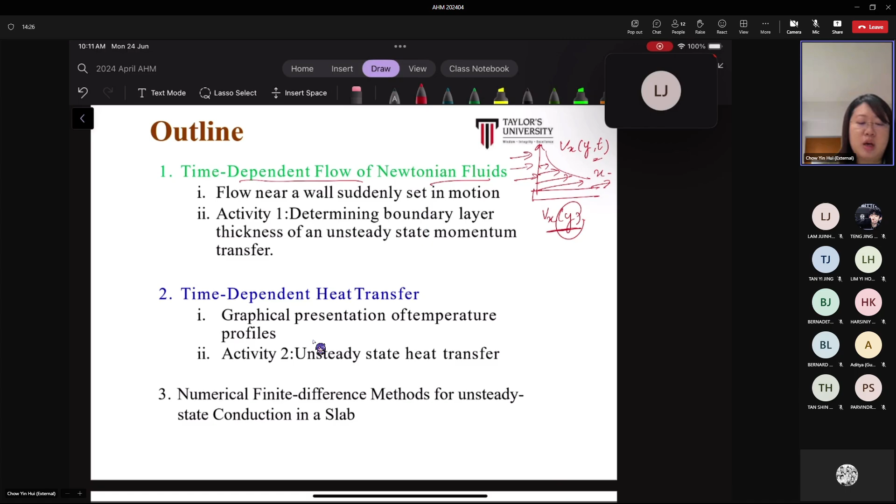For the case, let's say if we have a plate and a fluid that is suddenly set in motion, if we move this plate in the X direction, you are going to look at how the velocity profile actually changes with position and also with time. So your Vx now is a function of both y and t. Previously, for steady state, your velocity profile is only a function of y, it will not change with time. That's the difference between time-dependent flow and steady state momentum transfer.

We'll look at one example later and see how we solve all this, no worries. For the first 2 parts that I will discuss with you, we will solve using graphical method, but I'll still need to cover the theoretical part with you.

All right, so I'll go through some of the theoretical part, like how the equation is being formulated, and then to the part that they convert all the solution into a chart, which we can use conveniently. So for the formulation part for this topic, you're not expected to know how to do that, because we can't actually solve it at this level.

So for this topic, the learning outcome will map to only these two learning outcomes. For the time-dependent flow, it's related to analyzing the flow behavior of engineering systems using the laws of conservation. So it will map to the analyze level only, not the formulate level.

So then the second part of our lecture today, we'll discuss unsteady state heat transfer. This is something we have never discussed before. Most of the time you might know that the flow might not be steady, but how about heat transfer? So heat transfer, there are some cases where it will encounter unsteady state heat transfer as well.

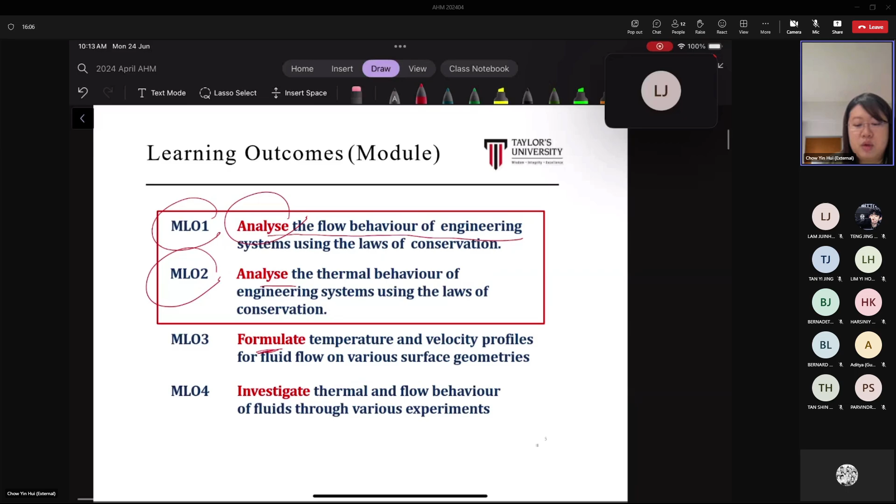And then same thing, we'll use graphical charts to solve for unsteady state heat transfer. So this one will map to your second learning outcome, analyze the thermal behavior of engineering systems using the laws of conservation.

And to the final part, this is something interesting. For mass transfer, last time for unsteady state mass transfer, you all learned about numerical methods where you need to derive the equation for each of the nodes, and then do a calculation by iteration method to find the equilibrium concentration. This one here is a slightly similar concept, but we can actually solve it directly by hand calculation. No iteration is required. We can solve it by hand calculation.

And the same concept is such that we will assign nodes into the system also, and then there are formulas that are ready. Then you just need to apply it directly to the nodes, and then you can do the calculation. So that's the last part that we are going to discuss.

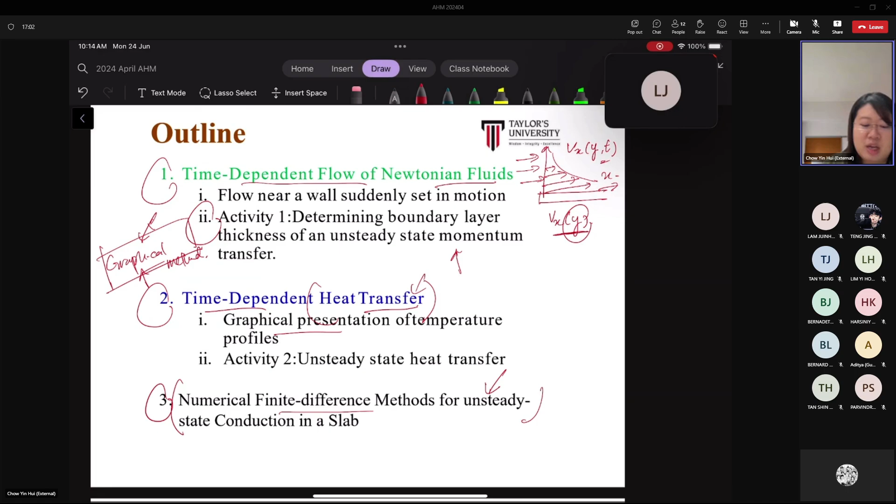All right, so 3 sections today. Now, why do we need to learn about time-dependent flow, or say unsteady flow process? Because we know that usually when you start up any process, even when you open your tap water, you notice that the water that flows out, it's not in a streamline manner first.

Usually it's something like bursts out first. So definitely for the start of the process, a few seconds or 2 minutes, there will be unsteady state flow. And when that's the case, then usually the velocity depends on the position and time. So let's say if it's a flow in the x direction, this is the x direction, this is the y direction, so your velocity will vary in the y direction, because at the surface, let's say this is the case where you are going to set this plate here in motion by applying a force, and then the plate will move at a velocity of v naught.

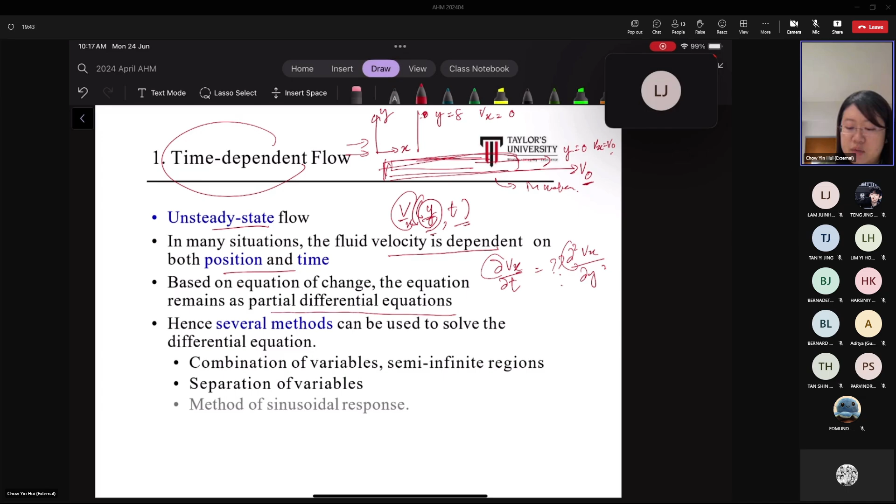Okay, and to solve such an equation, this would be the mu over density. So to solve this equation, there are a few methods we can see here.

We have the method of combination of variables, separation of variables, and the method of sinusoidal response. We are not going to discuss the sinusoidal response method because it only applies to some cases that deal with the system responding to external forces in a periodic manner.

So the methods I mentioned, the combination of variables and separation of variables, we'll be introduced to. I'll show you the introductory part of how they actually come to the solution.

For time-dependent flow, there will be an example of how they solve it using combination of variables, then separation of variables. You'll have an example later of how they apply it to time-dependent heat transfer. Let's see the case here.

So you have a plate here, and imagine there's a layer of fluid. At some time smaller than 0, the fluid is still at rest. This is position X, and the thickness of the fluid or film is in the Y position. So at time less than 0, if the fluid is at rest, then Vx equals 0.

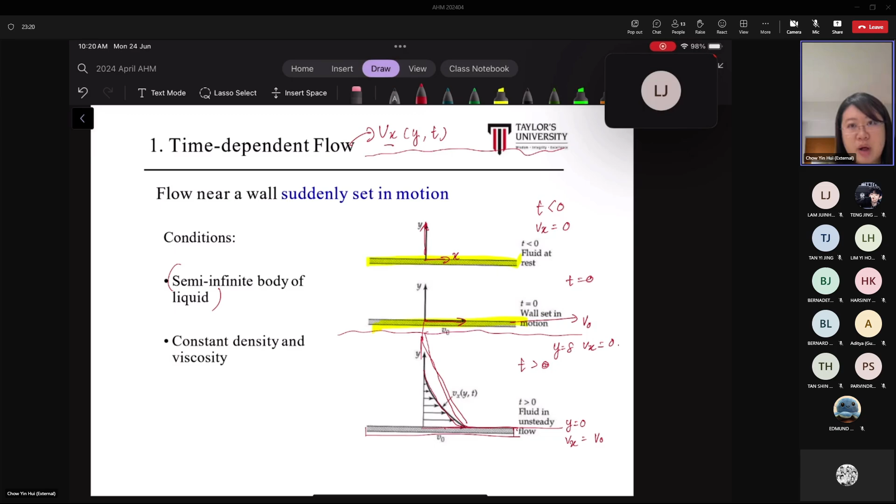Now let's see how they simplify the equation of motion. As we talked about, flow is only in the x direction, so the velocity in y and velocity in z of the fluid will be 0.

So if Vy and Vz equal 0, recall this is the equation of motion, and this is the continuity equation for Cartesian coordinates. If Vy and Vz equal 0, the first derivative of Vy and the first derivative of Vz would also be 0 for the continuity equation.

So if the partial derivative of Vx with respect to x is 0, then the second partial derivative of Vx with respect to x will also equal 0 - there should be no factor of 2 here. That's how we simplified this term on the left-hand side, from the equation of continuity, since Vy and Vz equal 0 because flow is in the x direction only.

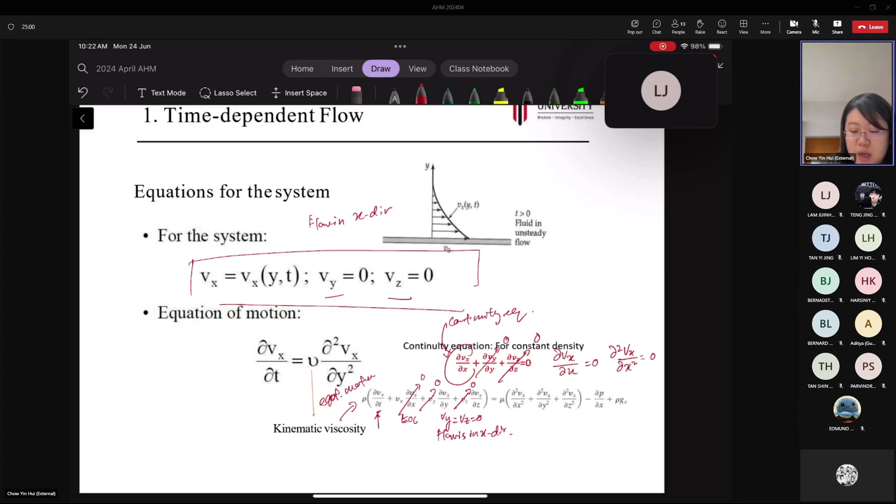Okay, so at the same time, let's do a quick revision for the equation of motion here. For this term, the rate of change of velocity with respect to time, because we are discussing the case of time-dependent flow, we will need to retain this term since it's an unsteady state process. Unless it's a steady state process, like what we did previously, we would assume this term to be 0. So now the second derivative of Vx with respect to x is equal to 0.

That we have proved from the equation of continuity. And the flow, the Vx, will only vary in the y direction, so therefore we will assume this term to be 0. And as for rho gx, because it's a horizontal flow, we assume rho gx to be equal to 0 as well.

A bit of a special thing for this case here: the pressure drop, the change of pressure along the length of the plate, is equal to 0 even for horizontal flow. This is because we are not assuming any fluid pushing from behind this section; rather, it's the plate that is set in motion that causes the fluid to flow. So that's why this term will be equal to 0.

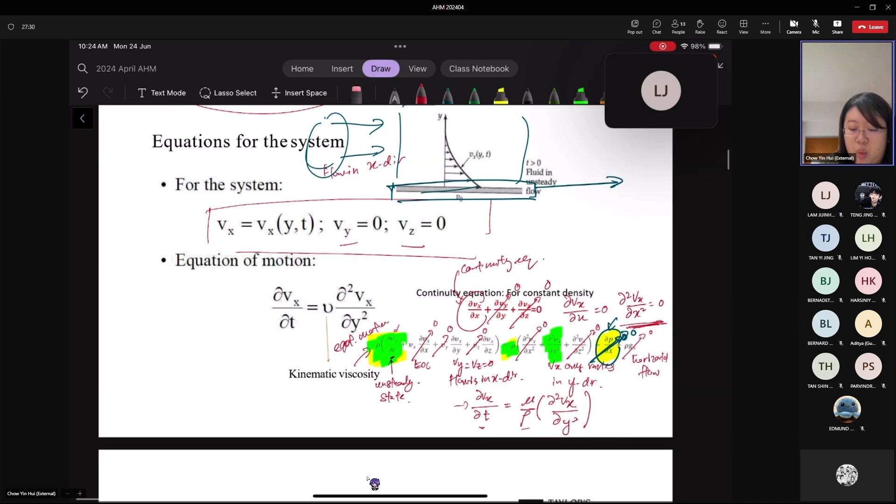So now you can see the rate of change of Vx, velocity in the x direction, with respect to time, is equal to the viscosity divided by density, multiplied by the second derivative of Vx with respect to y. This term, viscosity divided by density, we can also express as kinematic viscosity. So this equation of motion can be simplified to this form, where kinematic viscosity is viscosity divided by density. So your equation of motion for Cartesian coordinates, flow in the x direction, will be reduced to this form for the case of time-dependent flow.

Now this is a very special case, where you can see Vx varies with both time and position, so it's a partial derivative. Then how can we solve it? Unlike what we did previously, it's not reduced to an ordinary differential equation because your velocity is not changing with time there. In that case velocity only varies with one variable, but in this case it varies with two variables.

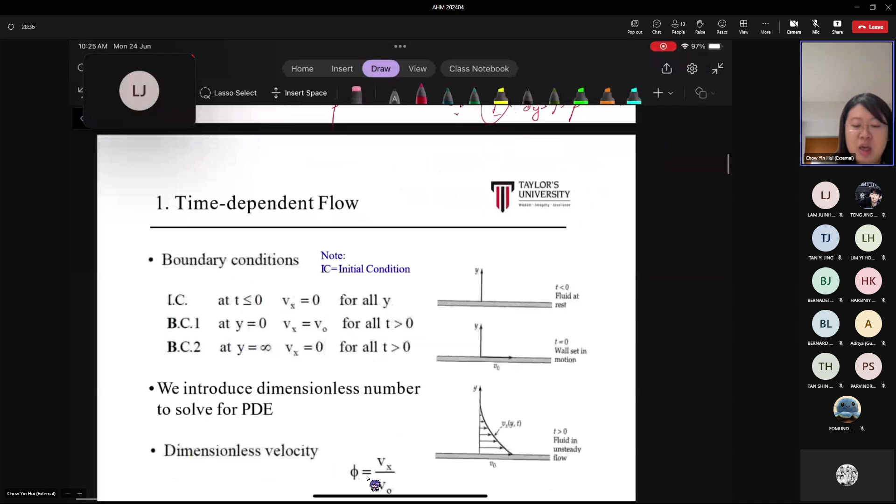So one of the solutions proposed by a person called Blasius—you'll learn more in depth about this solution next week, related to the boundary layer theory—was proposed by Blasius. For this solution, they use the combined variable method to solve it, and eventually the solution is presented in chart form.

Now, how do they actually solve this partial derivative? First you need to understand the boundary conditions clearly. We know that when it's at rest, when t is smaller than 0, the velocity at any position throughout this whole layer is equal to 0. But when the plate is set in motion, at y equals 0, the velocity of the fluid at this layer will travel with the plate velocity.

And at y equals, let's say—because it's a semi-infinite layer of fluid, apologies, this should be infinity—our velocity at a position sufficiently far away from the plate in the fluid, Vx, will then be equal to 0. Now to solve this, for the combined variable method, Blasius proposed a dimensionless velocity.

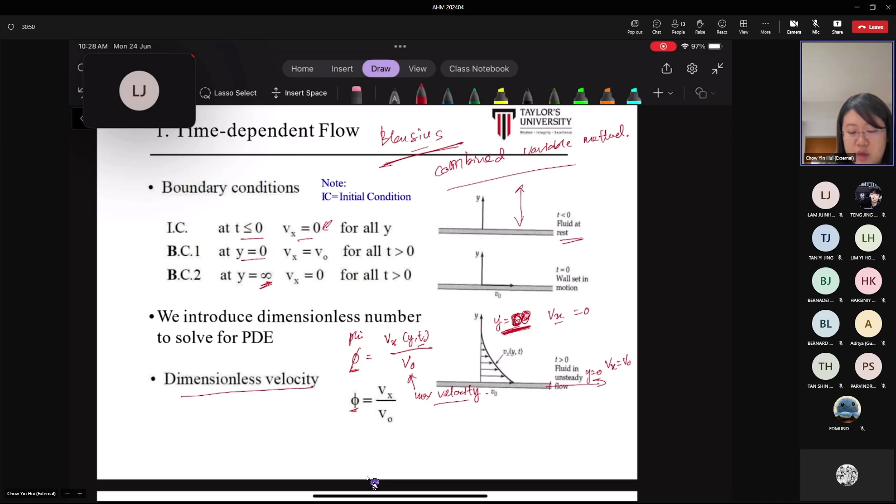This dimensionless velocity is expressed as phi, the Greek mathematical symbol. It's expressed as Vx, which means the velocity in x at any position y and any time, with respect to V naught, because that is the maximum velocity of the fluid. So phi is expressed as a fraction of Vx with respect to the maximum velocity.

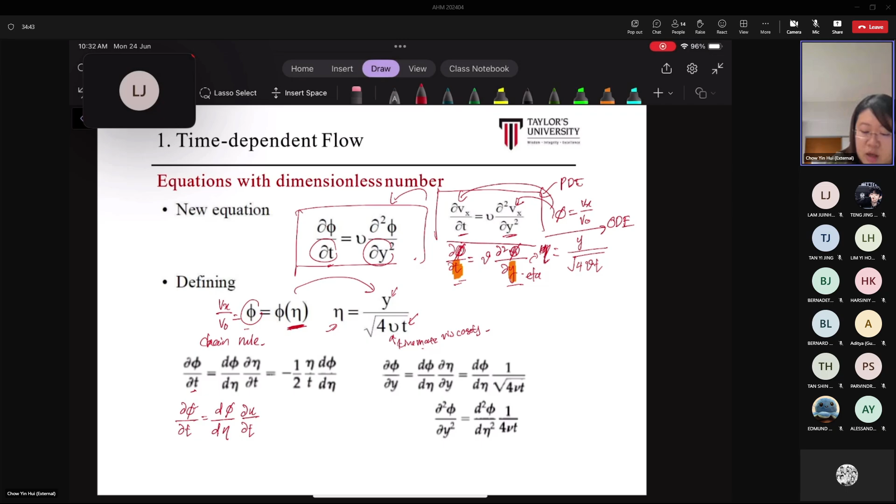Now let's try this. To get the expression for the partial derivative of eta with respect to time, let me rearrange this first. Let's express eta in this form so it's easier to differentiate: y divided by square root of 4 multiplied by kinematic viscosity and time can be re-expressed to the power of negative half. Then if we take the partial derivative of eta with respect to time, this will equal negative half of y, and as for the time term, it will become t to the power of negative 3 over 2.

Okay, to the power of negative 3 over 2. Now, if we rewrite this one, it can also be expressed as t to the power of negative half multiplied by t to the power of negative 1, right?

And this section here, you'll notice it's the same as this one, which means we can rewrite it so it appears like this, then divided by t. So which means you can simplify it as negative half of eta per time.

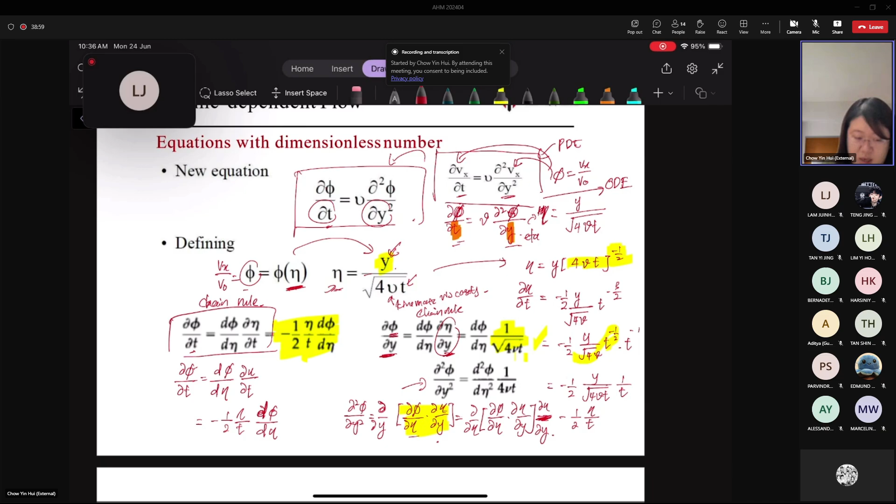And then partial derivative for eta with respect to y. Now simplifying this one, we'll get the second partial derivative of phi with respect to eta. Then you can see you have two of this term, multiplied by the partial derivative of eta with respect to y, squared.

And that's why when we solve it, it's the second partial derivative of phi with respect to eta, then this one is the square, if you look here, this is the square of the partial derivative of eta with respect to y, which is this part that you have solved. If we square it, it will just leave with 1 over 4 times kinematic viscosity and time. So this is how they obtain the solution.

All right, no worries everyone, this is just for your knowledge, you are not expected to do this for this topic.

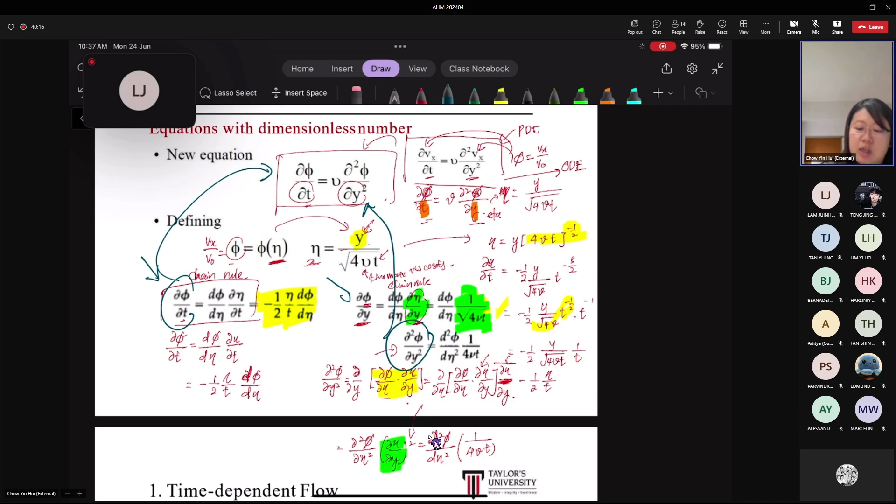So with all this expression just now that they have solved, you can see this is for this one. And then this here, we'll need to substitute it in the equation of motion that we have simplified. So substituting it and rearranging it, maybe I can show you very quickly here.

So you can see if on the left hand side, substituting it, and on the right hand side you have kinematic viscosity, multiplied by this term here, the second derivative of phi with respect to eta, then 1 over 4 this. Now simplifying this one, let's see, this will cancel out, and then we have time here, so time here can cancel out each other as well.

And then so rearranging it, let's see, did we miss anything? Okay yeah, so if you rearrange it, let me do it slowly.

Okay, first derivative of phi with respect to eta. I think it's easier if we do it like this. So this 4 here, if I multiply, we get negative 2 eta. And then here we're left with the second derivative of phi with respect to eta. So rearranging this, the second derivative of phi with respect to eta plus 2 eta multiplied by the first derivative of phi with respect to eta is equal to 0.

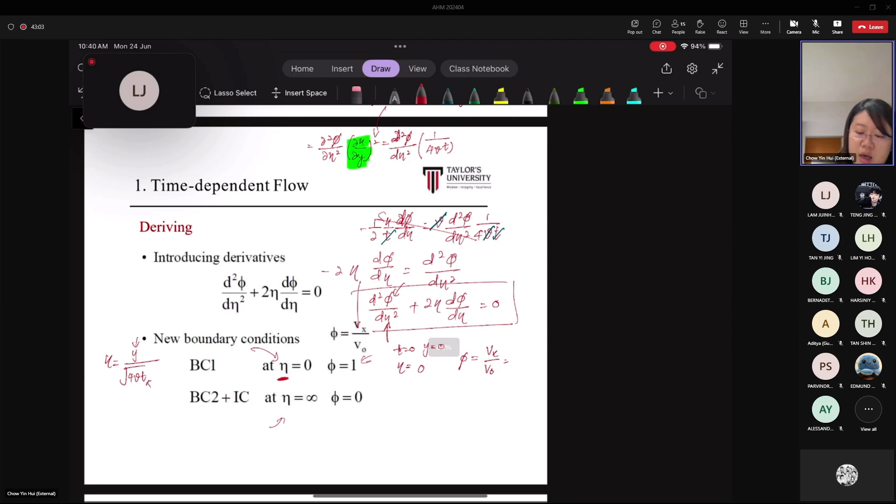And for boundary condition 1, let's say at some time greater than 0, but at position y equals 0. So if this value goes to 0, your eta is 0.

But if you recall, the plate, if you set it in motion at v naught, the velocity profile looks something like this. At y equals 0, your Vx will then be equal to V naught. So it will be equal to V naught over V naught, and that's why we get the value 1 here for the first boundary condition.

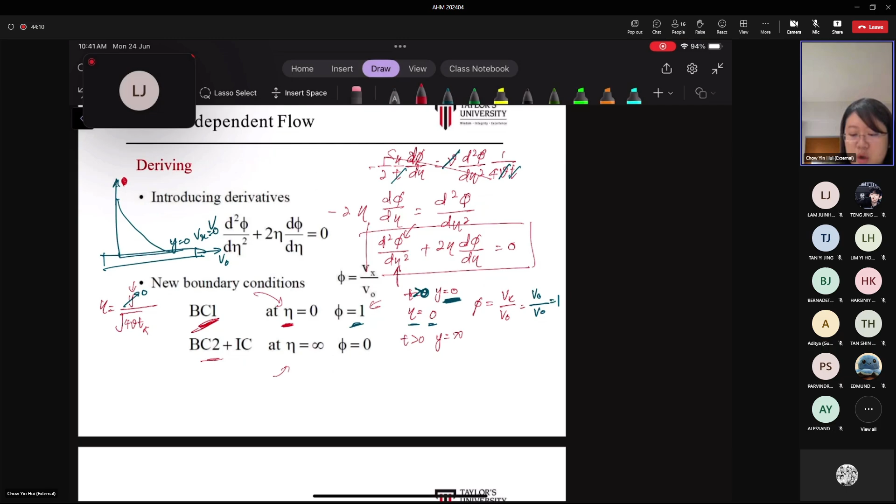So then for boundary condition number 2, let's say somewhere sufficiently far away in the semi-infinite fluid, that's when for time bigger than 0 and at a position which is almost equal to infinity, very far away from the surface. If that's the case, imagine your eta, which is this equation here, and this value almost approaches infinity, so your eta would be a very great value.

And we know that when y is approaching infinity, Vx is equal to 0, so your phi, which is equal to Vx over V naught, is then equal to 0 over V naught, and that's why phi is equal to 0. So all the boundary conditions have to be rewritten in dimensionless variables as well. So with the dimensionless boundary conditions and with this equation here, let's not confuse you further.

So how do they solve this equation? For this part, they propose that the solution to the first derivative of phi with respect to eta is equal to psi. We call it psi, and psi is equal to this expression here. There's actually a method to obtain this value, but I won't confuse you further today.

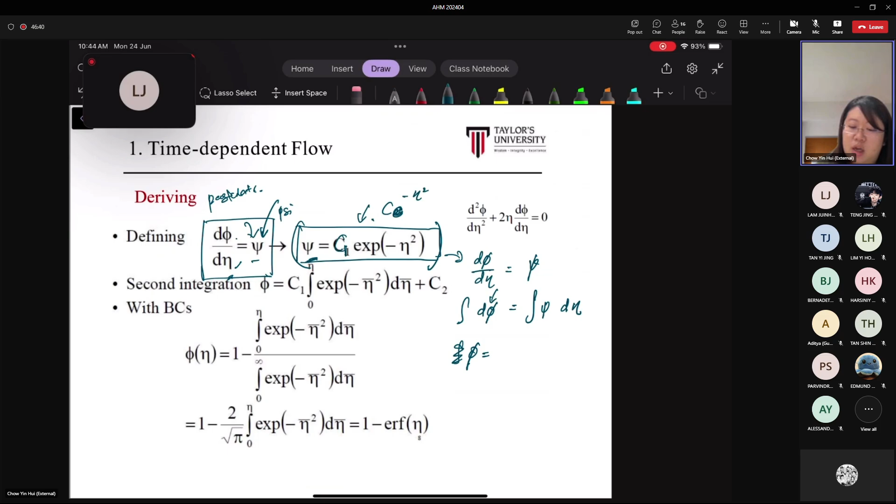So if the first derivative of phi with respect to eta is equal to psi, then if they need to get an answer for phi, they will need to integrate psi with respect to eta. So if they solve the integration, it's something like this: psi is this expression, so substituting it, it becomes exponential of negative eta squared with respect to eta, plus c.

So then, if you apply the boundary conditions here and solve it further, this is the solution that they obtained, which can actually be simplified into just... so what happens here?

So what happens here is phi, which is actually Vx over V naught, and it's a function of eta. So it will be equal to 1 minus the error function of eta. So phi is equal to 1 minus the error function of eta.

Now, replacing phi back here, Vx over V naught is equal to 1 minus the error function of eta, where eta is equal to this expression here. Or we can also rewrite it as the complementary error function of eta.

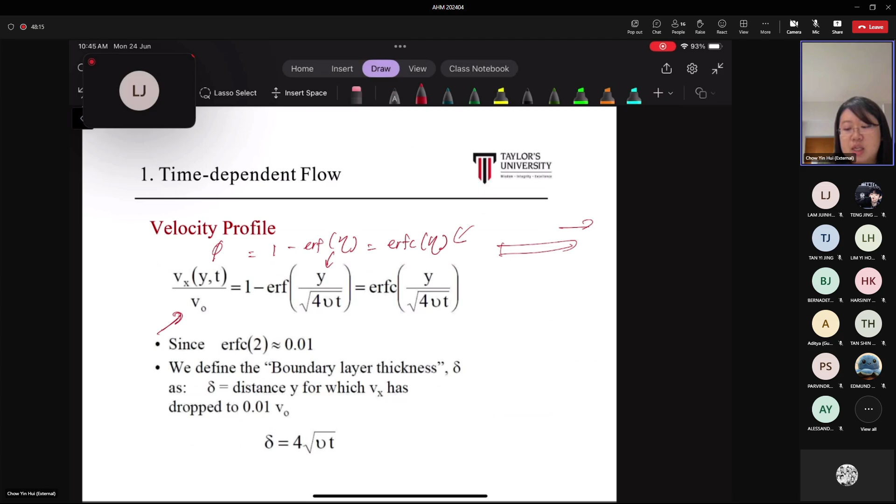Now, Blasius also found that when eta is equal to 2, Vx over V naught is equal to 0.01. Which means Vx is equal to only 0.01 of V naught when eta is equal to 2.

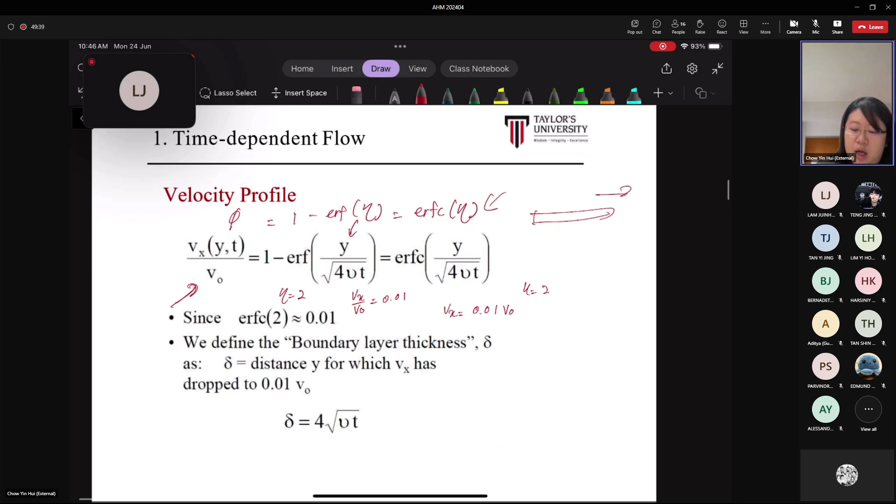So now let's say we want to get an expression for the boundary layer thickness. We know that eta is equal to y over the square root of 4 multiplied by kinematic viscosity and time. Substituting eta equal to 2, and since we want to find the boundary layer thickness, we substitute y equal to delta so that you can find the expression for the boundary layer thickness.

Now rearranging this, what we obtain is delta equals 2 multiplied by the square root of 4, multiplied by the square root of kinematic viscosity multiplied by time. Simplifying this, you get 4 multiplied by the square root of kinematic viscosity and time. So this is the equation.

This is what I showed you, how we solve it. So this is the equation that you can use to solve for the boundary layer thickness for the case of time-dependent flow when the fluid is suddenly set in motion. Take note of this equation here.

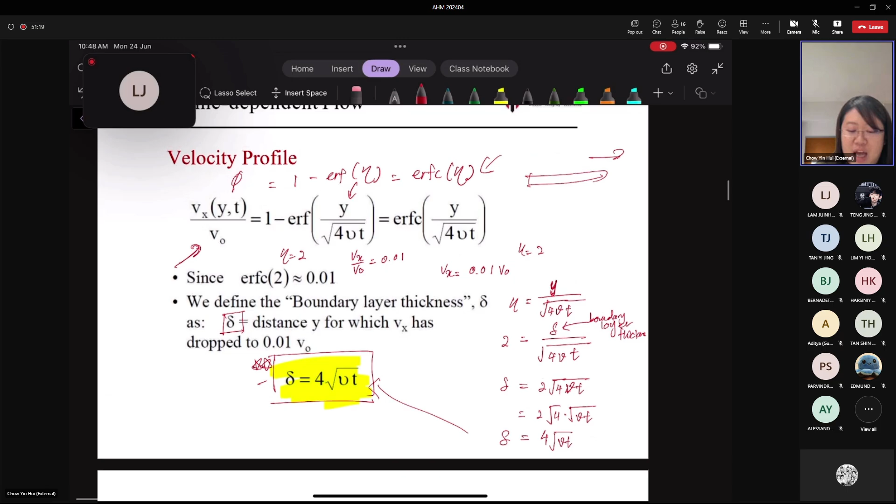Anyone? Actually, I want to ask about just now the boundary condition that you defined, this one. What is it? IC - initial condition.

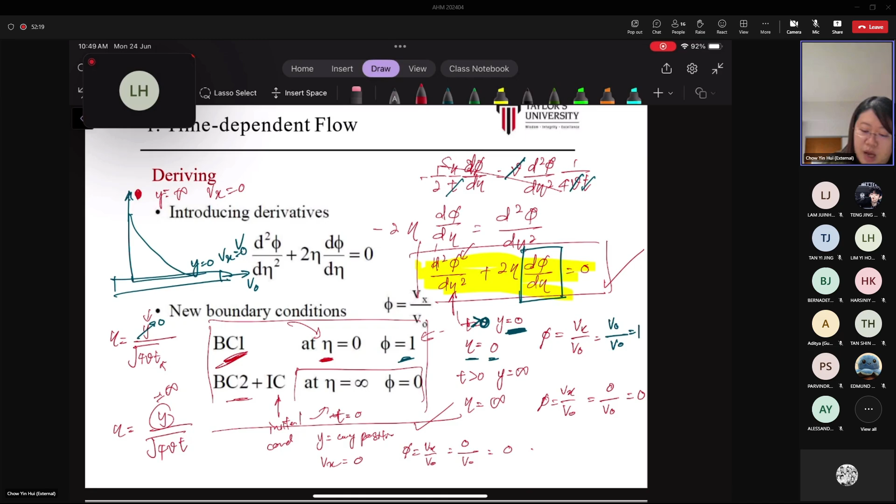Initial condition, so the initial condition is where the fluid is at rest. Which means at any position of y, when t is smaller than 0, we know that velocity Vx is equal to 0. That's why here your phi, which is Vx over V naught, since Vx is 0 at rest, the phi is still equal to 0. So this answer applies to both boundary condition number 2 and the initial condition. Thanks, Yihong, for asking this.

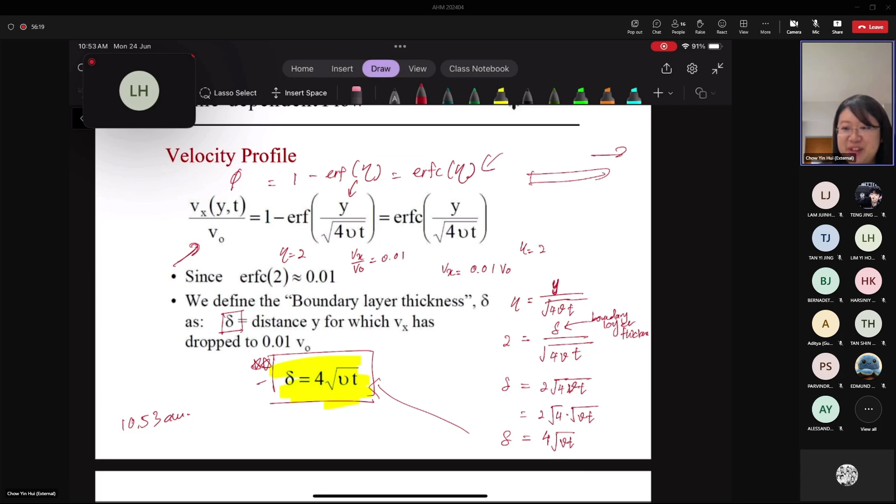A fluid that is initially at rest on the surface of a flat plate is suddenly set in motion when the plate is pulled in the positive x direction with a velocity of V naught. So here, this is the y direction, this is the x direction. The plate is set in motion at a velocity of V naught, and you are provided with the kinematic viscosity of the fluid, which is 3.45 times 10 to the power negative 4 meters squared per second.

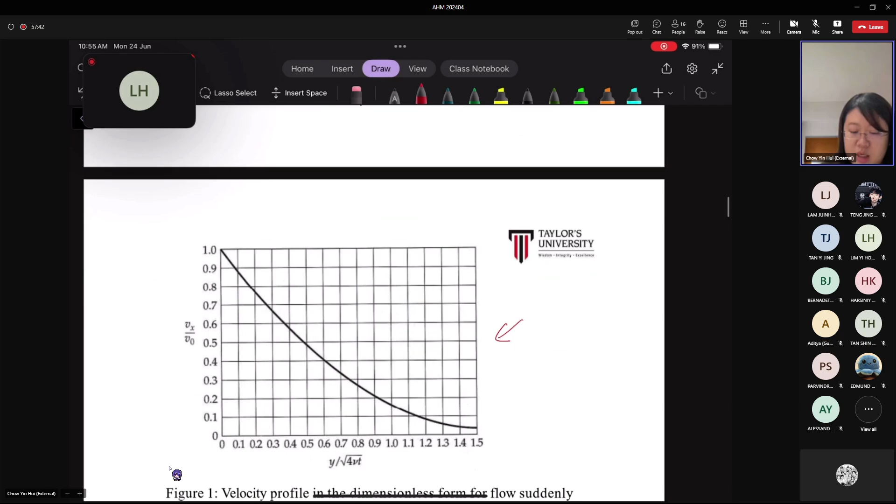The velocity profile in dimensionless form is shown in Figure 1, which is this one here - the velocity profile for a fluid that is suddenly set in motion. V naught is the velocity of the plate, Vx is the velocity of the fluid, and Y is the thickness of the liquid. Now you need to find the time taken for the fluid to achieve 50% of the initial velocity of the plate.

So 50% of the initial velocity of the plate, at the position y which is at a distance of 0.5 mm from the surface of the plate. What does this 50% mean? Since the plate is set in motion at velocity V naught, 50% of the plate's velocity means the ratio of Vx with respect to V naught equals 50%, or in fraction form, equals 0.5. Now we need to solve for the time.

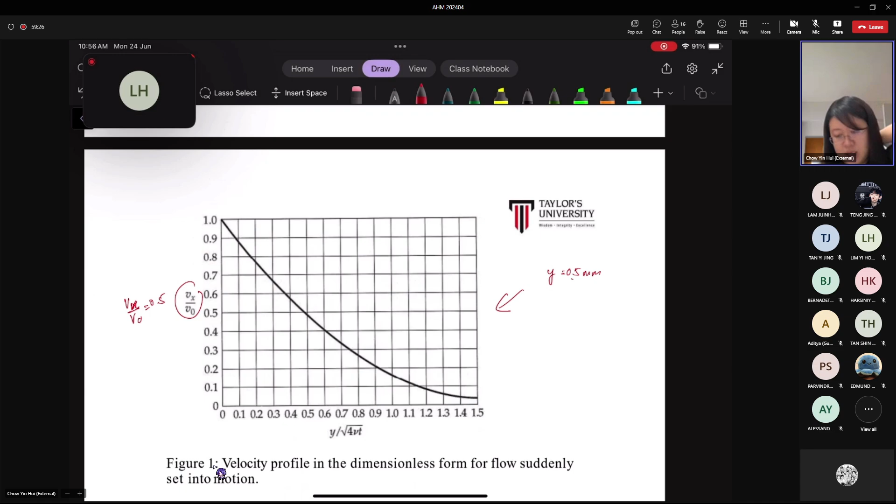To solve for this time, recall that the y-axis is Vx over V naught, so Vx over V naught equals 0.5. We want to find this at the position y equals 0.5 mm from the plate. So what would be the time? This is eta - eta equals y divided by the square root of 4 multiplied by kinematic viscosity and time. Time is what we're looking for.

For y, imagine it's at a position 0.5 mm from the surface, and we find the time when the velocity is 50% of the initial. If you trace it on the chart at 0.5, where Vx over V naught equals 0.5, it intersects the velocity profile curve. So the eta value we find here is equal to 0.48.

Substituting this value, and also the y value of 0.5 times 10 to the power negative 3 meters, divided by the square root of 4 multiplied by kinematic viscosity, which is 3.45 times 10 to the power negative 4 meters squared per second, multiplied by time. You can try to do this calculation here.

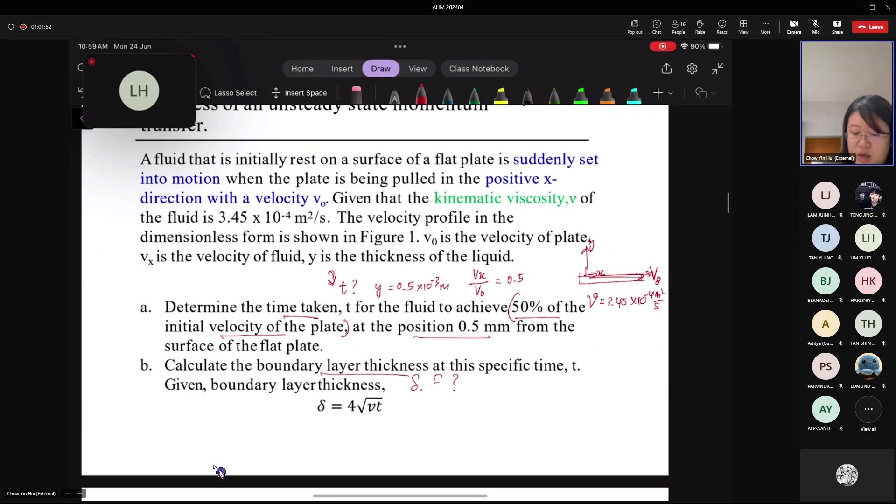So this is the solution for part A. Now they want you to calculate the boundary layer thickness at the specific time we just solved for. For the boundary layer thickness, we have tried out this section here to see how they get this equation.

So this is the equation you are going to apply to find the boundary layer thickness for time-dependent flow. It equals 4 multiplied by the square root of kinematic viscosity and time. Substituting, kinematic viscosity is 3.45 times 10 to the power of negative 4 meters squared per second, and time is 7.86 times 10 to the power of negative 4 seconds. So the boundary layer thickness would be around 0.00208 meters, which means it's only around 2.08 mm.

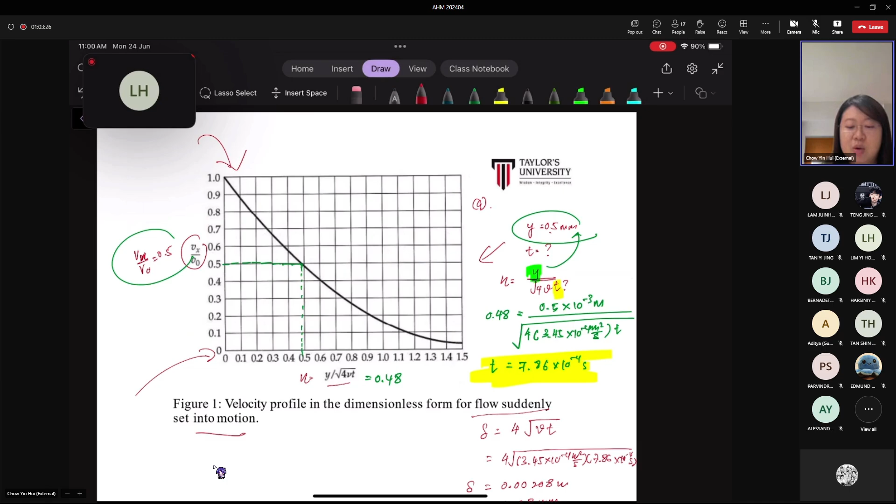So that's the example on how to apply this graphical chart to solve for flow suddenly set in motion. Any questions so far? If it's all good, give a thumbs up so I know everyone is still fine. It's much simpler, right? When all the solution is compiled in this chart, you can use it directly to solve for time-dependent flow, finding the time when a certain position reaches a certain velocity, and also the boundary layer thickness. That's the end of the part on time-dependent flow. The solution is also presented in the slides, separated into a few slides so you can go through it later.

Now we will move to the second part for today. Although there are 3 parts, this part is all about unsteady state heat transfer. For this second part, the difference is that the solution for the graphical chart is solved using the separation of variables method. I'll go through it briefly with you, the method, how they reach here. But take note, you do not need to formulate it yourself - it's just for your knowledge. So why are there actually 2 sections here?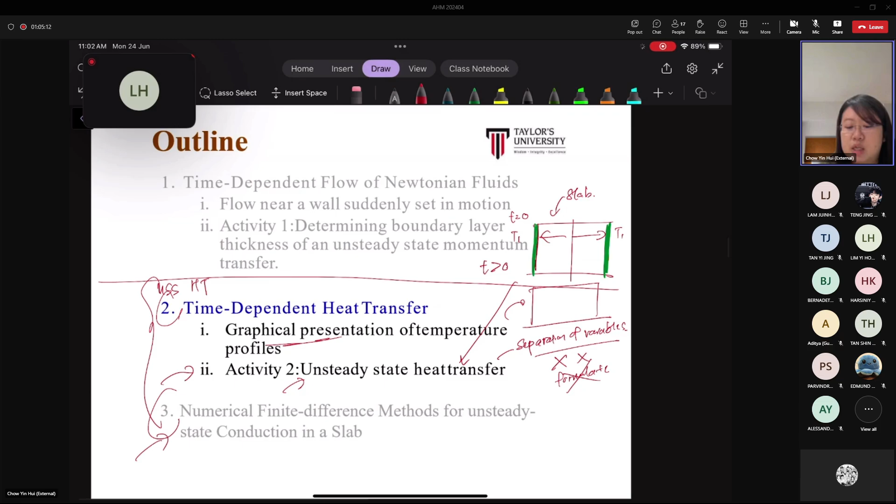For this one we're discussing for the graphical chart method, we are assuming an unsteady state heat transfer in the X direction for a slab. At some time t greater than 0, these two surfaces straight away reach temperature T1 and it is held constant at T1 throughout the whole unsteady state heat transfer process. We use this chart to solve it. For the numerical finite difference method, it can apply to this case where the temperature at the surface reaches T1 and is maintained throughout the process.

Or it could also be applied to the case where this surface of the slab, at time equals 0, has environment temperature TA, but T1 will not equal TA. This could happen because of some resistance to heat transfer near the surface. If we recall the heat transfer profile for convection, it looks something like this: this section is where you have the velocity boundary layer because fluid mostly flows in a streamlined manner, so heat transfer is mostly by conduction in this region - that's why there's resistance to heat transfer. So this numerical method applies to both cases: where the surface temperature reaches T1 directly, and where T1 at time 0 is not equivalent to the environment temperature. This is how you can apply it in the example we'll see today. Let's look at the first one, how we use the graphical method.

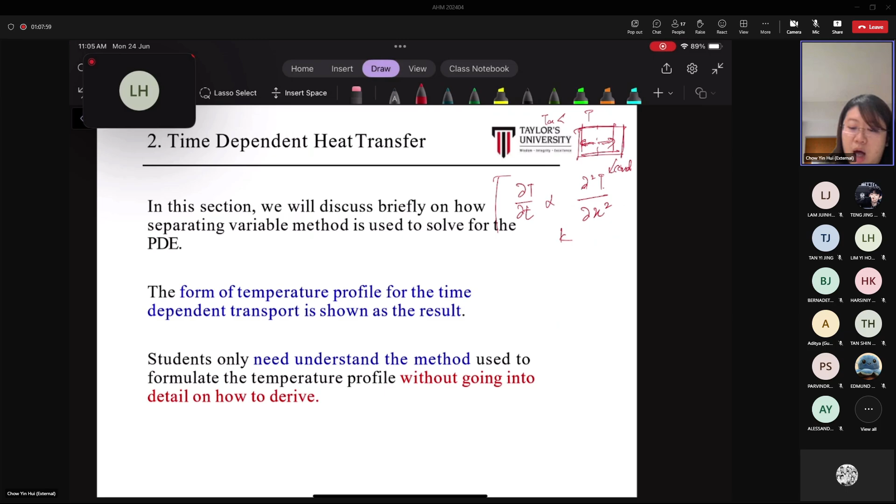So how is this whole equation being written? Take note, you only need to understand the method, you do not need to know how to derive it. No worries, we are going to solve it using the graphical method.

Let's see, the equation actually looks like this. From the equation of change of temperature that we discussed last week, if there's no fluid flow, because we're dealing with the case of a slab, then Vx, Vy, and Vz on the left hand side all equal 0. So you're left with this term here, which you need to retain because it's unsteady state heat transfer.

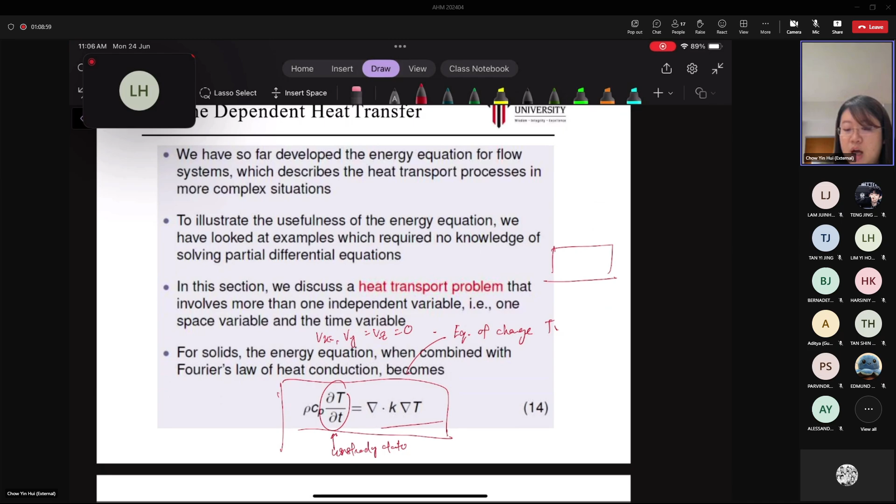On the right hand side, we assume the viscous dissipation term to be 0. And since heat is only conducted in the X direction, you only see this term here, which is the second derivative of temperature with respect to X.

This equation is written in this form because thermal conductivity may not be constant over the range of temperature being investigated. If the thermal conductivity is constant, the equation is rewritten in this form: the rate of change of temperature with respect to time equals alpha times this del operator squared, which is the second derivative of temperature with respect to X. Now, what is alpha?

If you compare to this equation here, alpha is actually the thermal conductivity divided by density and specific heat capacity. We call this term the thermal diffusivity.

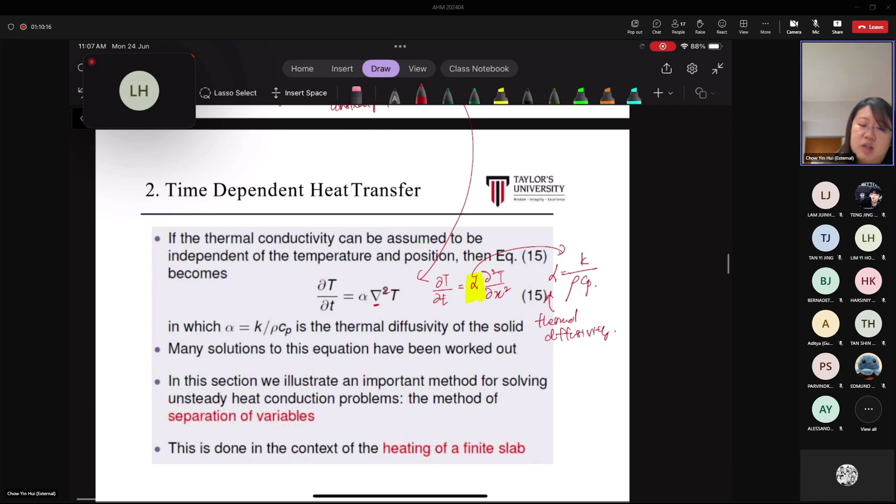Now, the example you'll see later shows how the solution is compiled into a chart, using the separation of variables method. We'll discuss an example based on heat transfer by conduction in a flat slab at unsteady state. Let's say this is a solid slab with a thickness of 2b.

So let's denote this position as y, where y equals negative b and y equals positive b. Initially in this slab, at time equals 0, the temperature is T naught, the initial uniform temperature within the slab.

Now suddenly, at time equals 0, these two surfaces at y equals negative b and positive b are raised to a temperature T1, homogeneous throughout at time t equals 0 and greater than 0. We then need to find the expression for the unsteady state heat transfer, the temperature variation in the slab.

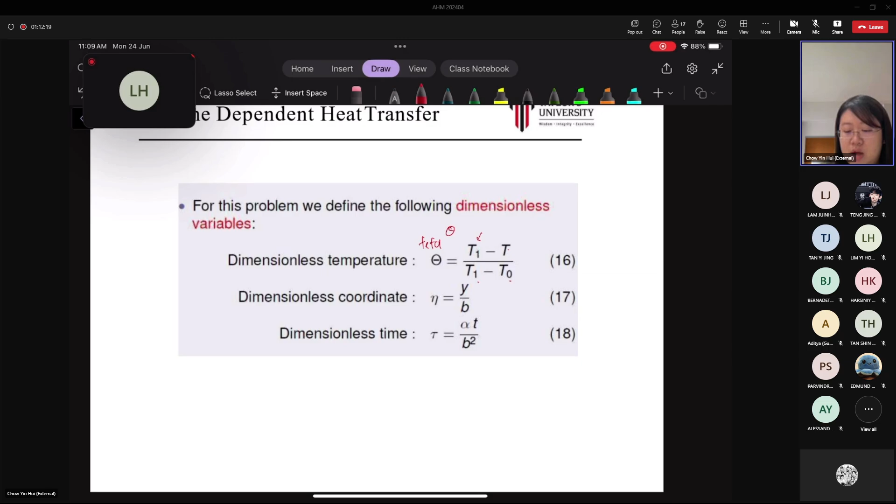The first one is theta, where theta equals T1 minus T divided by T1 minus T naught. T1 refers to the temperature at the surface, whereas T is the temperature we want to solve for at some given position Y and some time T, divided by T1 minus T naught, which is the initial uniform temperature.

Okay, so that's the first dimensionless variable. Next, they also introduce the dimensionless coordinate. They still use the same symbol, eta, but now it's y divided by b.

So at any position, y divided by the half-thickness of the slab. And for the dimensionless time, tau, it equals thermal diffusivity multiplied by time, divided by the square of half the thickness of the slab.

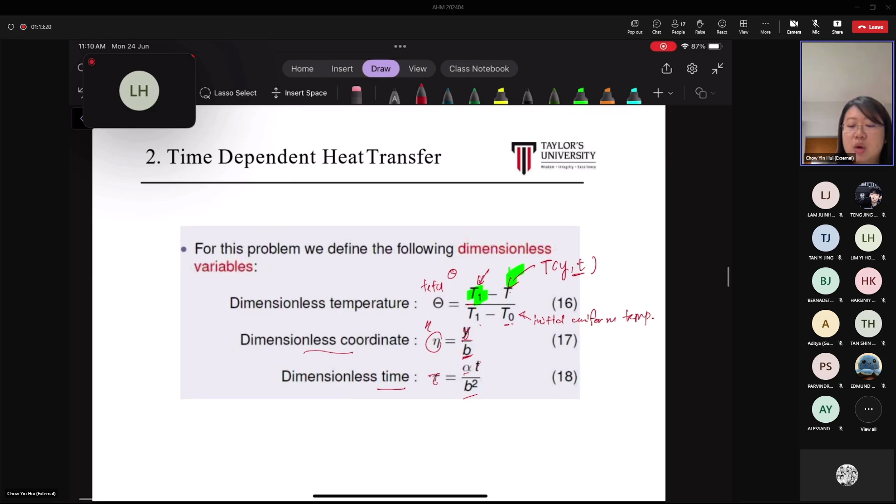By introducing these three dimensionless variables, they will rewrite this equation in terms of the dimensionless variables. So this term, the temperature, will be replaced with theta, which equals T1 minus T divided by T1 minus T naught.

As for time, they substitute it with the dimensionless time, tau, and for position, it will be substituted with the dimensionless coordinate, represented by eta. So then the equation is rewritten in this form now.

Same for all the boundary conditions, we need to rewrite them in terms of the dimensionless variables. So for the initial condition, when time is smaller than 0, we know that the temperature is constant at T naught.

For the dimensionless time, the equation is alpha T divided by B squared. So if time is much smaller than or equal to 0, then tau equals 0. And for the dimensionless temperature, T1 minus T naught divided by T1 minus T naught, therefore it equals 1.

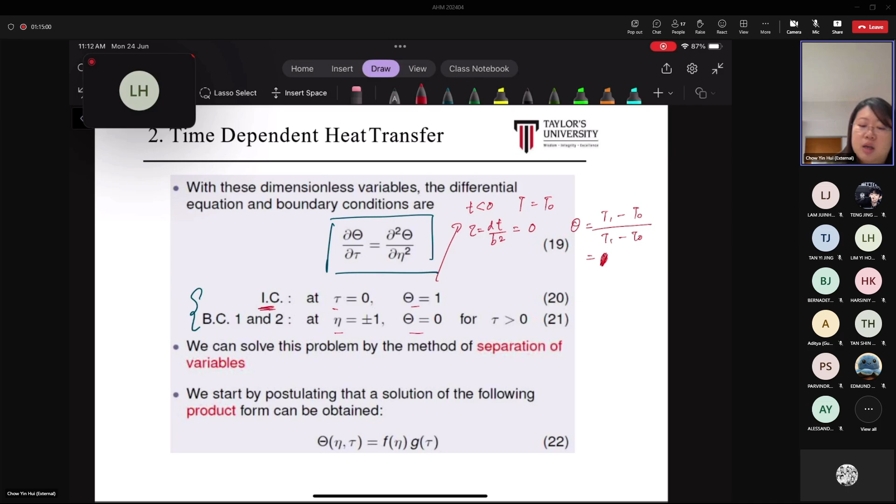So as for boundary conditions 1 and 2, it refers to this surface here, when y equals negative b and y equals positive b. For this case, when time is greater than 0, tau will then be greater than 0.

Depending on which side of the surface you're showing, eta could be positive or negative, since y can equal plus or minus b. So that's why your answer is plus or minus 1 here for eta.

And then for the dimensionless temperature, the formula is T1 minus T, and since at any time greater than 0, these two surfaces will reach T1 directly. So it's T1 minus T1 divided by T1 minus T naught, which equals 0.

Now, how do they propose to solve this? Separation of variables method. So again, they postulate a solution. This is how some mathematicians try to solve very complicated cases—they postulate a solution to it first.

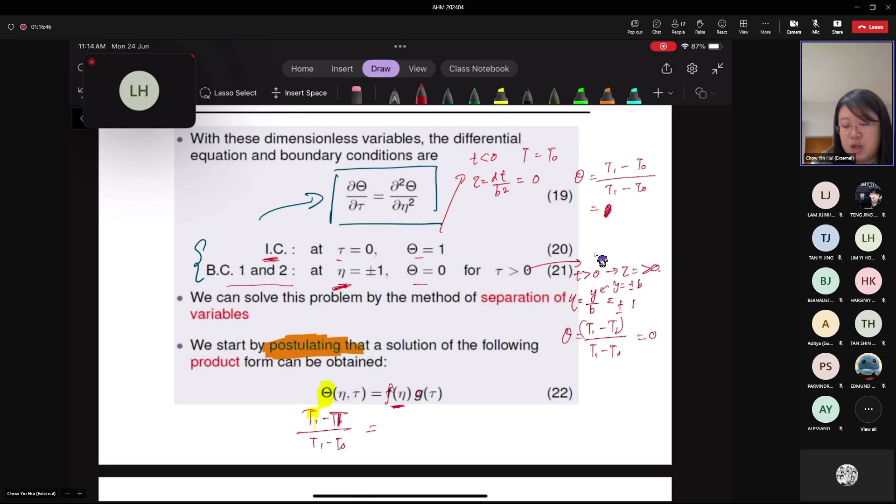Let's say this solution, the dimensionless temperature, T1 minus T divided by T1 minus T naught, is a function—F, a function of eta, and G, which is a function of dimensionless time. So now it's actually quite a long solution.

So now if they substitute—let's say this is the solution—they will need to substitute it here.

So now let's solve for the first derivative of theta with respect to time. Only this part here is affected, so the function of eta is still a constant. Then here it will be written as the first derivative of g with respect to time.

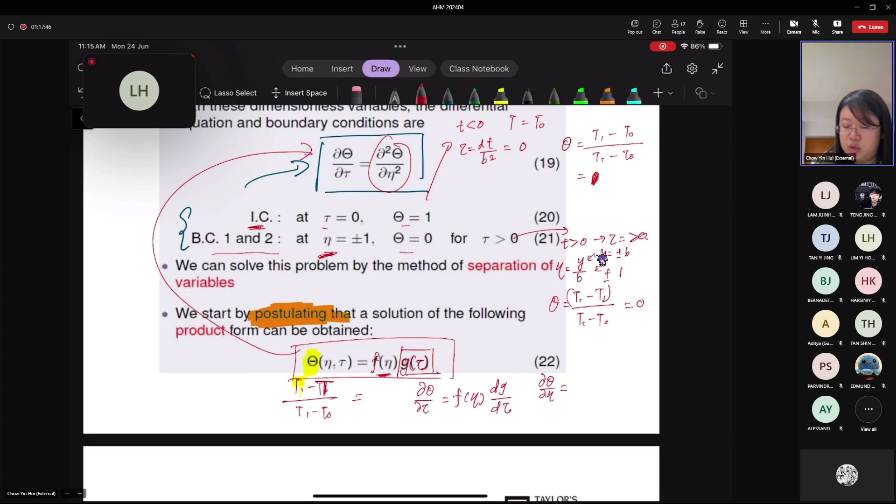Now we'll need to get an expression for the first derivative, since eventually it's a second derivative. So we start with the first derivative of theta with respect to eta first. Then you should get g, the function of g, multiplied by the first derivative of the function f with respect to eta. Then solving the second derivative.

So solving the second derivative, which means it will still be g, the function of g multiplied to the second derivative of f with respect to eta. So now that's how it works, right? So if we substitute it, the function of eta multiplied to this one equals, on the right hand side, g, then the second derivative of f with respect to eta. So it will look like this, and then if you rearrange it, that's what you see now. Because here, if you look, you have eta here and eta here.

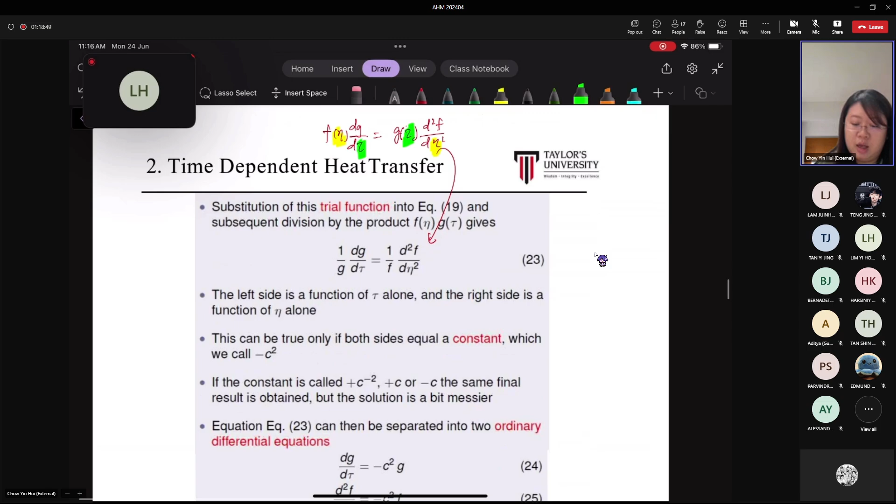The variable tau, the dimensionless time, is here. So we'll need to rearrange the variable so that on the next few steps, when they solve it, they can do the integration. So you can see now the g is rearranged to here and the f is rearranged to here. From now onwards, it's just an introduction, so it's very tough to solve it now. So to solve f and g further, they will need to propose another solution, which required a lot of trial, and eventually they decided that negative c squared, if they assume both f and g equal to negative c squared, the solution would be the most tidy one.

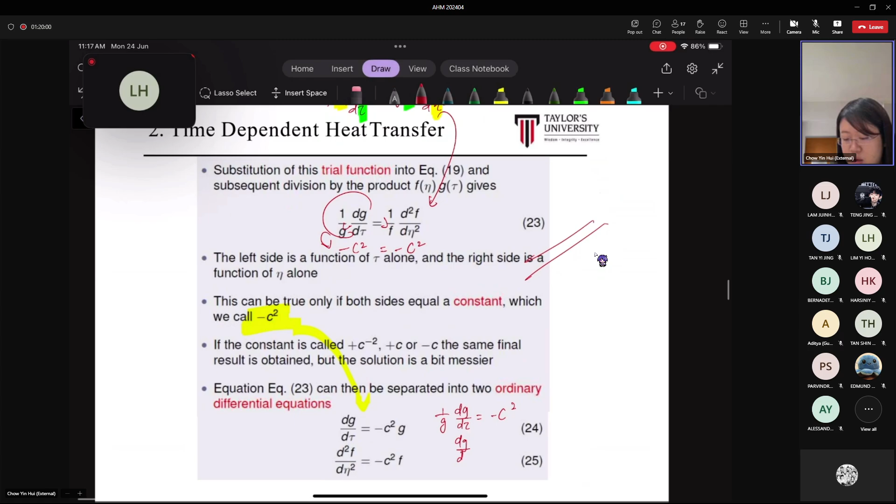So they are actually equating this part, each of this, assuming that it will equal negative c squared. So with this equal to this, 1 over g, the first derivative of g with respect to tau, equals negative c squared. Rearranging this, you get negative c squared multiplied to g. You do the same with this one, and then to solve these two equations, it has to go through a series of algebra and a lot of things. Eventually, for the dimensionless temperature, the solution is actually an infinite series. That's why we can't actually solve it by hand; you may need some computational power to help you solve this one.

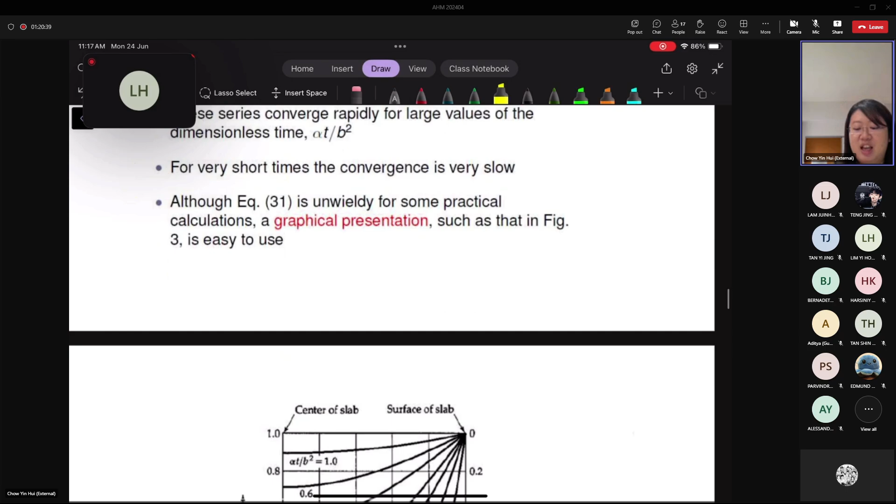With this, the whole solution is being compiled into an example here for the case of unsteady state heat conduction in a slab with a finite thickness of 2b.

With this one here, take note, for this side, if we are referring to the dimensionless temperature for the center of the slab, we'll look at this axis. If we are going to solve for the temperature at the surface of the slab, then we will follow this section here. On the x-axis you can see this is the dimensionless position eta, and this one is actually the dimensionless time tau.

Now you can see, at tau equals 0.1, so it's still a very small value of time after 0. At a small value of time after 0, the temperature has actually at least penetrated slightly into the slab. At the center of the slab, when tau equals 1, let's say almost towards the end of the unsteady state heating process, the dimensionless temperature will almost approach 1, which means you can expect the temperature at the center of the slab has also reached T1, the same as the temperature at the surface. That's 90% completion for the heating.

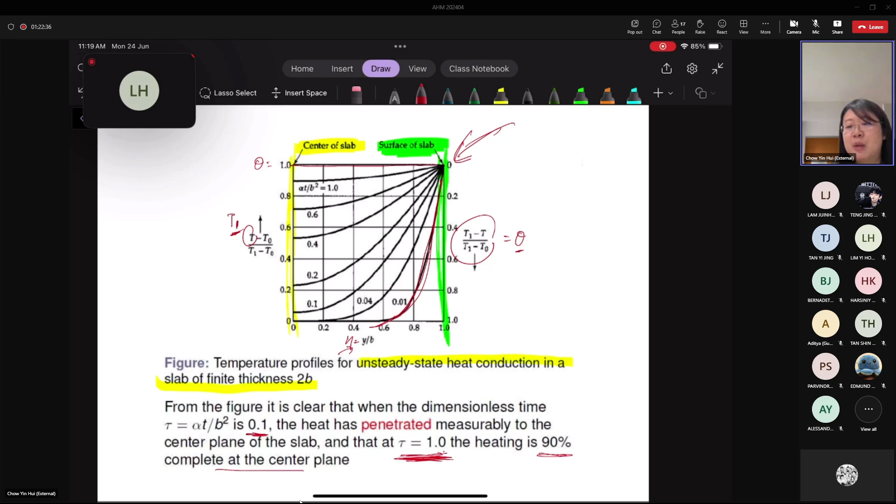So the important part is actually we'll need to know how to use those graphical charts to solve for unsteady state heat transfer. Now if no question, I think let's cover this example first. It's a very simple short example, so then after this we will take just a short break. All right, so now for this one, let's go through the question.

A slab with 1.9 meter thickness is at an initial uniform temperature of T0. At times smaller than 0, the temperature is held at T0, which is also equal to 300 Kelvin. Now, let's say the two sides of the slab are subjected to a temperature of T1. Along these two surfaces, at time equal to 0 and greater than 0, T1 is equal to 533.2 Kelvin, for both surfaces.

533.2 Kelvin. After a certain time t, it was found that the temperature at the center of the slab, at this position at the center, is equal to 400 Kelvin. This is at a position of y equals to 0. Now this is a slab with a thickness of 2b, so here is negative b, and this position is y equals to positive b. So at the center, it would be equal to 0.

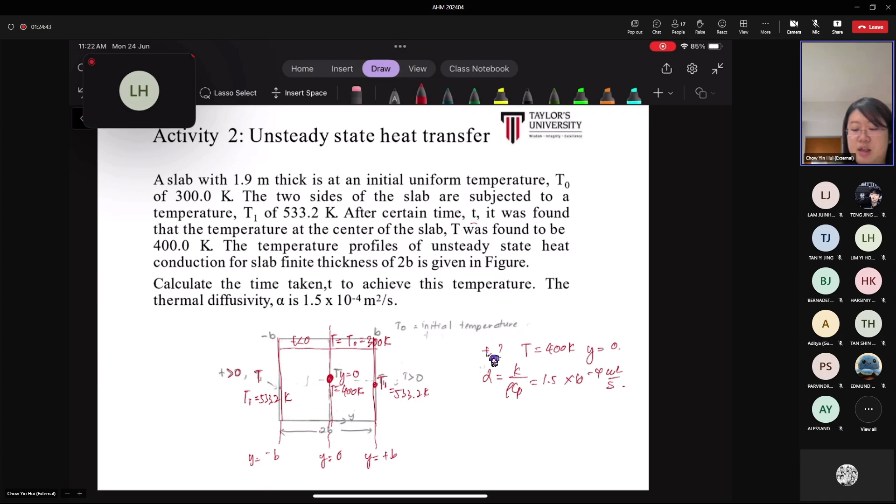So now to solve this, we are solving for the time taken for the center of the slab to reach this temperature. So for the center of the slab, we know all the temperature data, so we can actually find out the value here. It mentions that at the center when y equals 0, temperature is 400 Kelvin, but we are looking for the time. So let's substitute the value.

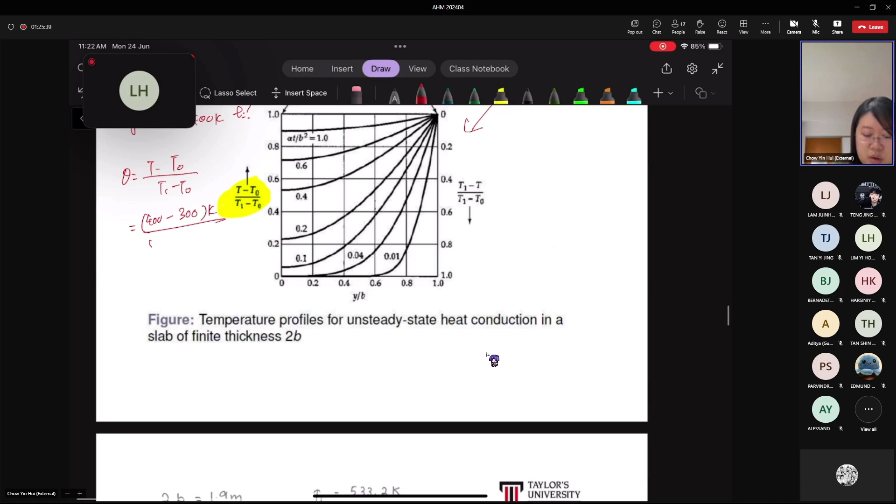It would be 400, T0 is 300 Kelvin, divided by T1 minus T0, where T1 is the surface temperature, 533.2, so 533.2 minus 300. You can see it's a dimensionless variable, showing the dimensionless temperature here. Let me check what's the answer - it's equal to 0.43.

Now if we know that it's somewhere around 0.43 here, let's say if this is 0.5, I'll use another color to indicate it. So let's say 0.43 is somewhere here, around 0.43. But then where should we refer for the x-axis? The x-axis here is the dimensionless coordinate, so if we are solving for the time taken for the temperature at the center of the slab to reach 400 Kelvin, then y is equal to 0.

So as I mentioned, it's 0 divided by half of the thickness of the slab, so it's still equal to 0. This means we'll be reading it along this line, along this axis here. Now if you look at all these curves, I'll just take this as an example.

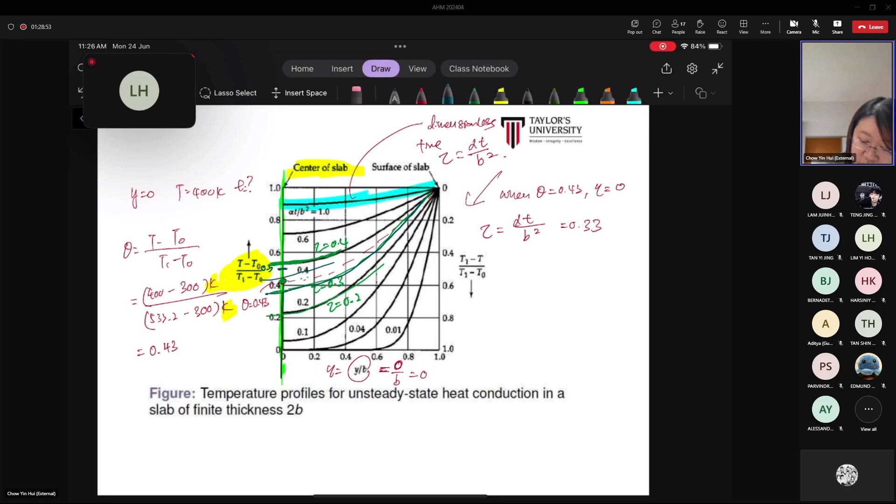Let me write it down: when the dimensionless temperature is equal to 0.43, and at the center of the slab, where eta equals 0, our dimensionless time that we can find from this chart, let's say is around 0.33. So let's say you have an imaginary curve here which is tau equals to 0.3, and along here is 0.35. So somewhere for this one, which intersects with dimensionless temperature of 0.43, is around 0.33.

Then we will substitute all the values, or you can also rearrange it if you want. We are solving for time, so it will be 0.33 multiplied by b squared divided by alpha. What is half of the thickness of the slab? The slab has a thickness of 1.9 meters, so half of it gives 1.9 divided by 2, which we need to square. And then the thermal diffusivity is 1.5 times 10 to the power of negative 4 meters squared per second.

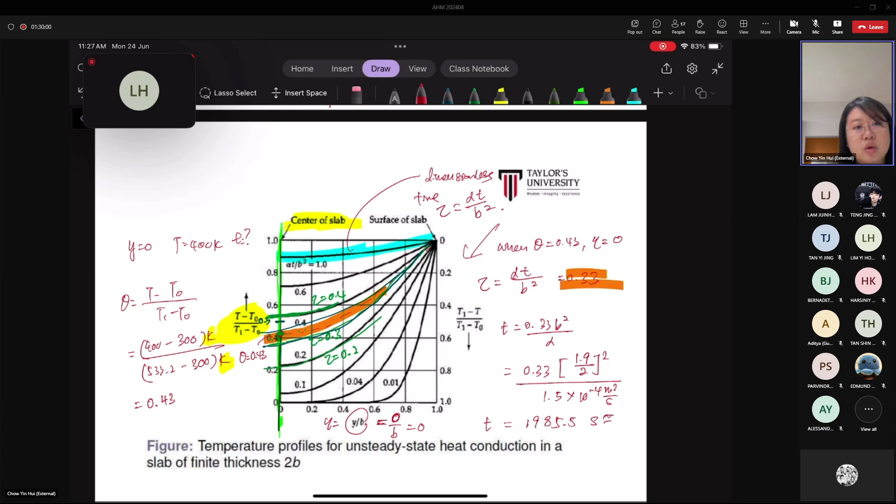All right, so solving this, the time taken for the center of the slab to reach 400 Kelvin for this unsteady state heat transfer will be around 1985.5 seconds, or equal to 33.1 minutes. So this is an example of how we can solve for the case when we are dealing with unsteady state heat conduction in a slab of finite thickness 2b.

Okay, any questions so far, everyone? If it's all good, perhaps you can show a thumbs up so I know you are still fine with following the topic so far. Okay, thank you.

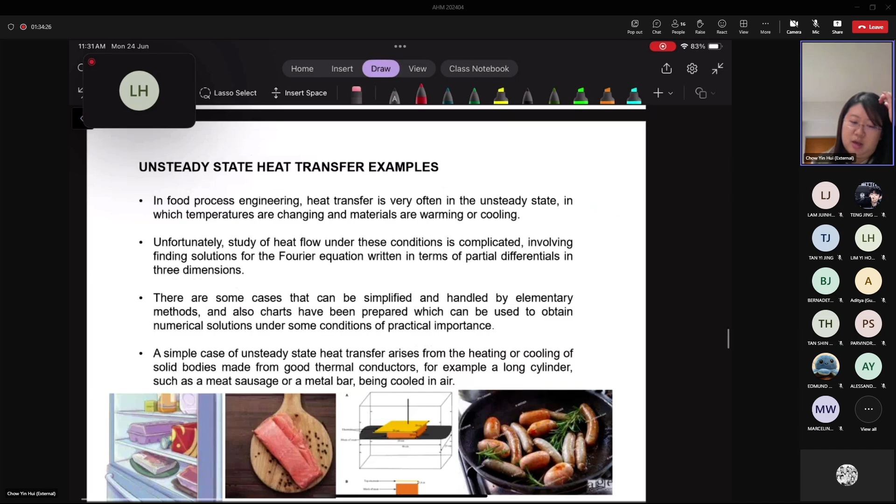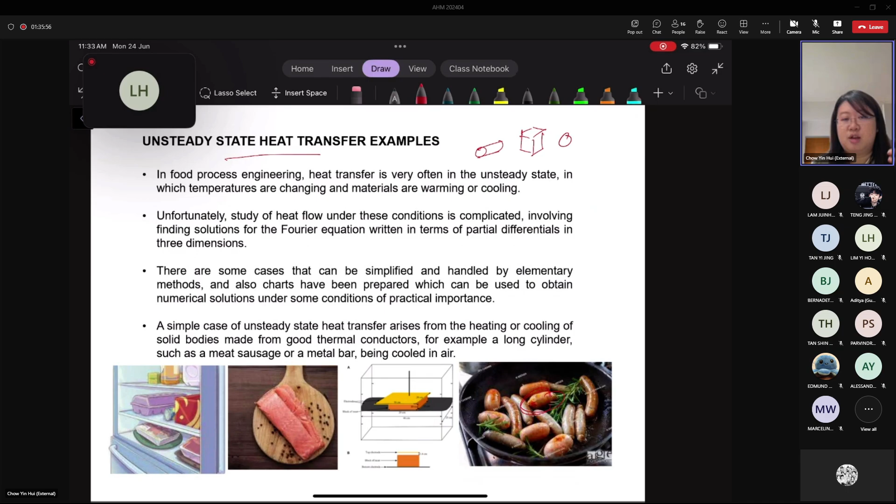Now, why are you learning about unsteady state heat transfer? This type of time-dependent heat transfer process occurs quite often in processes like heating and cooling, for example of foods or other things. If you understand the theory, then if you're designing a material in some different geometry, you want to know which geometry will actually have more effective heat transfer at unsteady state. Let's say you have a cylindrical shape, like for a sausage, or some food material. For yogurt, sometimes you find fruit particles, so what shape is actually the best? Because when manufacturing yogurt, it has to go through a heat treatment process to ensure the bacteria are killed, either pasteurization or UHT, ultra high temperature. How do we know what shape the fruit particles should be? Is it cylindrical, square, or granular? This is where we can apply unsteady heat transfer to find out.

Because if we want to kill the bacteria, we need to know the center part will reach a certain temperature, for a certain duration. When they want to achieve pasteurization, there are protocols for it, like the temperature has to hold around 70, I can't remember the exact range, but it's around 70 to maybe 80 something, for at least 15 to 30 seconds. So we can use this concept, the rate of change of temperature with respect to time for the center of the slab, with tau equal to some duration, to see if it will reach the pasteurized temperature, let's say T equals maybe 72 degrees Celsius. This is where unsteady state heat transfer analysis can be applied.

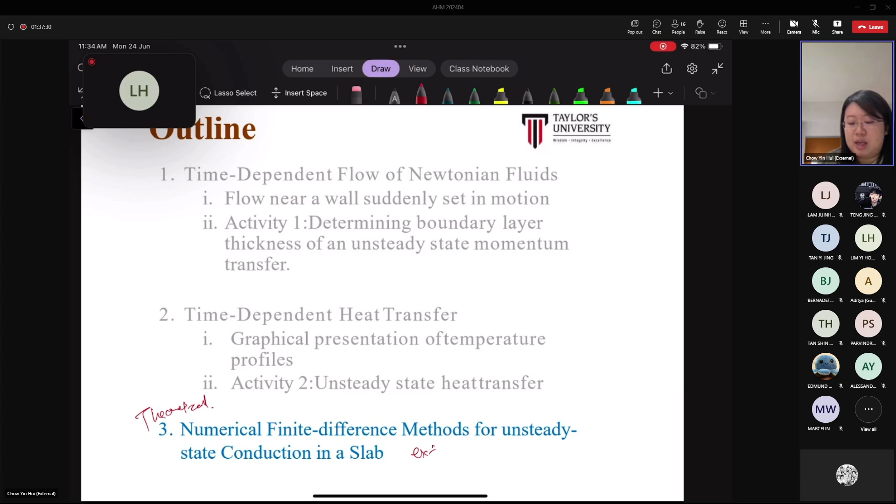So we'll use that as the discussion for the example. Now I'll only cover the theoretical part.

When do we apply the numerical finite difference method for unsteady state heat transfer? So what we solved previously for the unsteady state heat transfer was the case of conduction through a slab with finite thickness, where the boundary condition is constant at T1 with time. This means at any time greater than 0, it holds constant at T1 all the way.

But if the boundary condition is such that at time equals 0 it's still held at some value T, while the environment is at TA, then only when time is greater than 0 does the temperature at the surface of the slab reach a value. So this T1 here will reach a temperature which is equivalent to the environmental temperature.

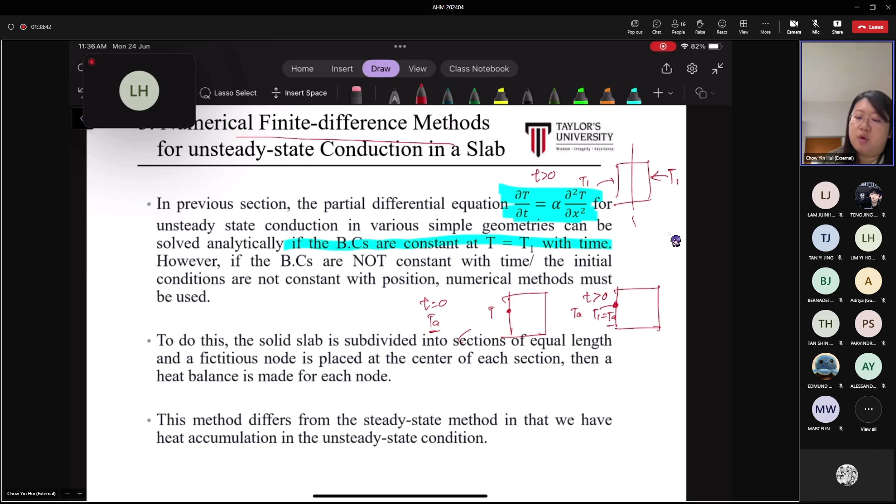So for this kind of time-dependent heat transfer, we will definitely use the numerical finite difference method to solve it. It can also be applied to this case, which is the example in the lecture notes — for the case where T1 is equal to the environment temperature.

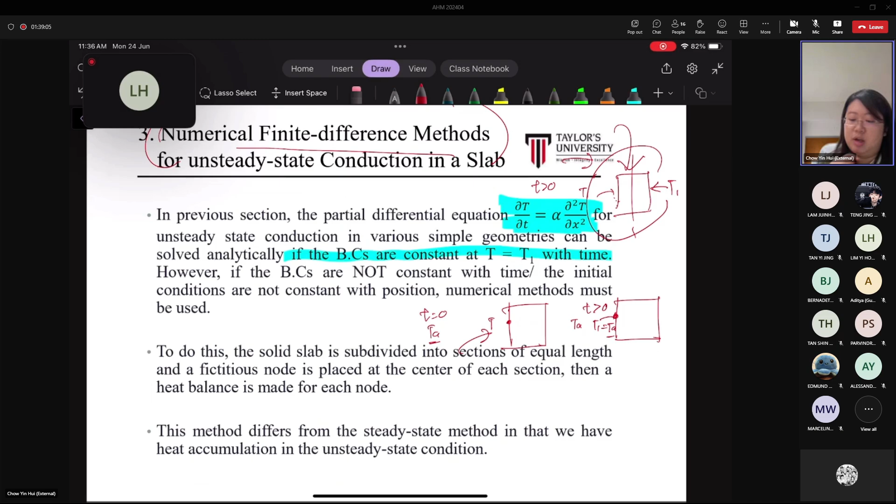Now, how is the numerical finite difference method applied? Let's say there's a slab here, it looks like this. Usually in heat transfer solved by the numerical finite difference method, we will divide the slab into equivalent sections, as you can see here.

For the center of each of the sections, we will assign nodes. So let's say this is node number 1, 2, 3, 4, 5, and 6, for example. Each section here refers to this one — each of these sections. This is one section, and then here we have another section.

So we divide them into equal sections, and for the center of each section we put a node, and then we derive the equation. We need to derive an expression to describe what is the temperature at this point at some given time T. This is how we are going to apply the finite difference method.

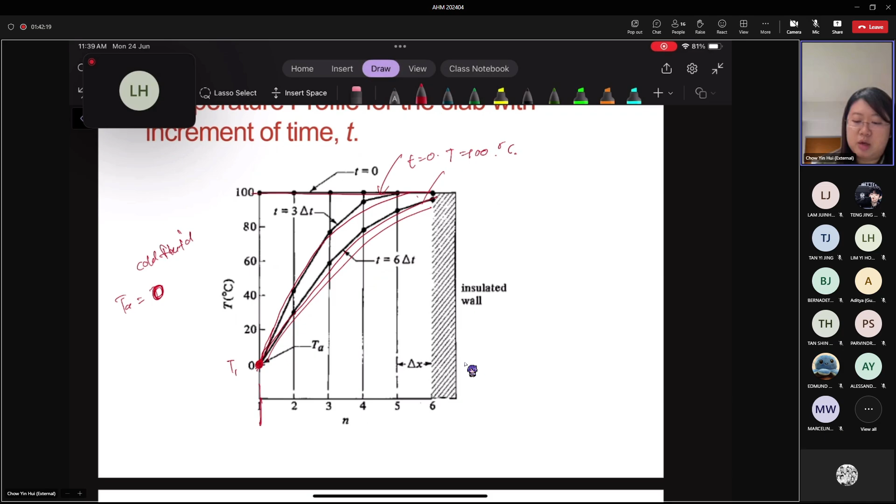Most probably your environment temperature is also 0. So at the third time increment, the temperature profile will be this one, and eventually around the 6th time increment, it will further drop to this temperature profile. It will vary like this for unsteady state heat transfer.

Now, how are we going to assign the formulas to describe the temperature for each of these nodes? Let's see — for each node, we are going to describe the first node as 1, then 2, and for the center of the slab usually we'll denote it as N, and the final node you can denote as F.

Okay, and the one before it, usually you can denote it as n minus 1, the one next to the center of the center section. Because this is node n, the node here you can describe as node n plus 1, while on the left side of node n you can describe it as n minus 1.

Okay, now let's say we are going to try to obtain the expression for this one. Let me see what happens here.

So let's say we are going to get an expression for the temperature here at a later time. How do we denote it? The temperature at node n, the center of the slab, at a later time, will be denoted as... so time, this is original time T, plus delta T, so at a new time. That's the symbol they are using. So the temperature at node n at a new time, T plus delta T. How are we going to get an expression?

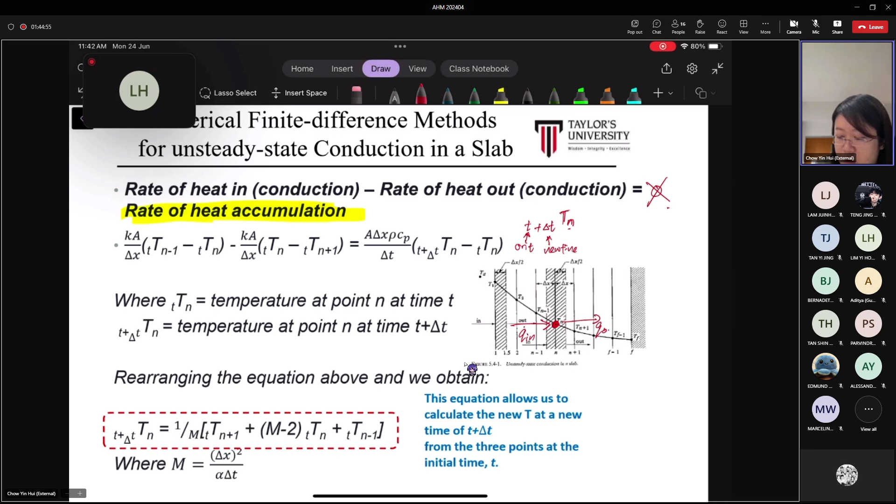So how are we going to express the rate of heat transfer in? For heat transfer by conduction it's K times A multiplied to dT/dx. As for the area, I think we can just express it as area. This is the change in temperature, this is the thickness of the slab. For this thickness here, for each section, you have an equivalent thickness, so we can express it as delta x.

So now, the rate of heat transfer into this node here, it will be K multiplied to A divided by delta x. So this is the rate of heat transfer in. As for the temperature difference, heat is transferred... let me correct the arrow so you can see. So the rate of heat transfer is from this section here, from the center of this section into this point, and then heat is transferred out to this point here.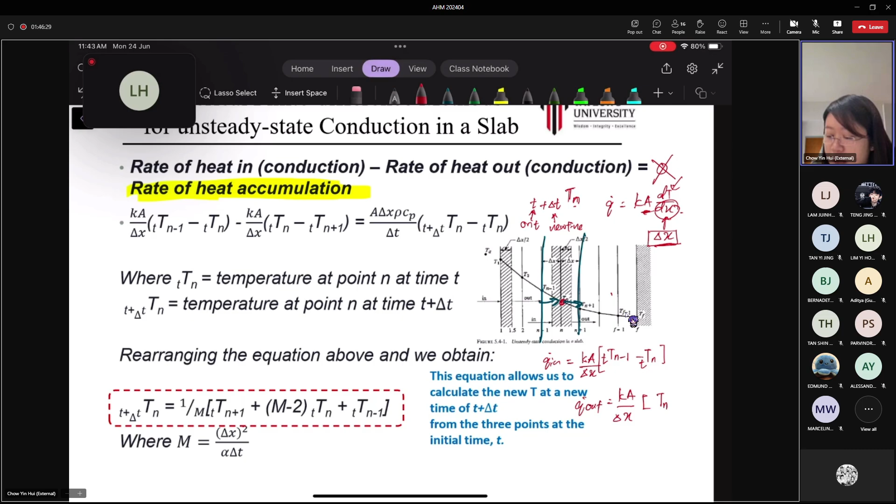That's why the change in temperature is expressed as the temperature at node n minus 1 at original time T, minus the temperature at node n at original time T. As for the rate of heat transfer out, it will still be K times A divided by delta x, from the heat transfer from node n. That's why it's the temperature at node n at original time T minus the temperature at node n plus 1 at original time T. So the rate of heat transfer in minus the rate of heat transfer out is equals to the rate of accumulation.

So for the rate of accumulation, if you recall back, it's density multiplied by specific heat capacity and the volume. For the volume, it's expressed as area multiplied by the thickness. This is divided by time, because it's rho Cp multiplied by volume, then rate of change of temperature with respect to time. That's why here you can see it's divided by the time increment.

As for the temperature difference, it's expressed as the temperature at node n at a later time - let me use another color - so that's T plus delta T, minus the temperature at node n at original time T. So this is how they obtain this equation here.

Now for this expression of temperature, the equation to find out the temperature here at the center of the slab, Tn, at a later time - if we rearrange the whole equation, it will look like this. The temperature at node n at some later time t plus delta t is equals to this whole chunk here, where M is being simplified already. The M here that is being simplified is actually equal to delta x squared, the thickness of the slab, divided by alpha, the thermal diffusivity, multiplied by delta T, the time increment.

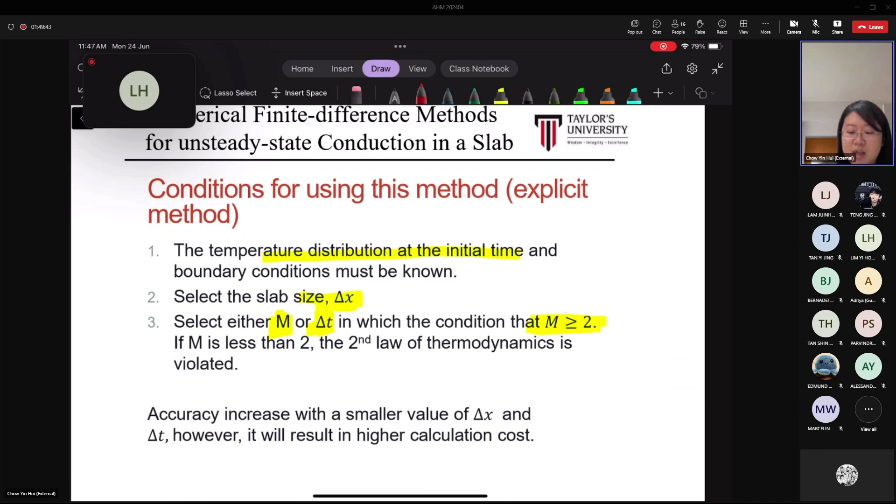So usually when we deal with the finite difference method or numerical methods, the smaller the value of the slab thickness and the smaller the value of the time increment, the more nodes you have, and you do it for more iterations, then the accuracy of the calculation will increase. However, the downside is the cost will be very high - one thing is time, the time consumption, and also if you're using a computer, it will cost some computational power as well.

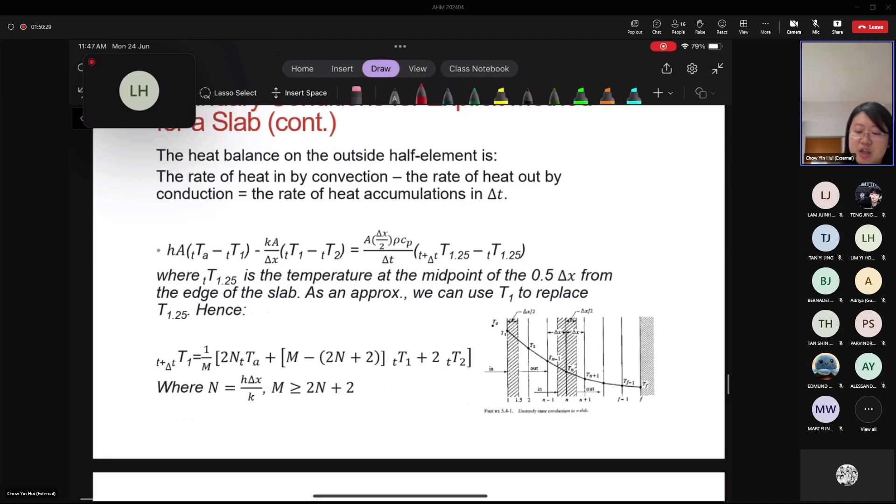So now you can also try how they get this expression here, let's say for finding out what is the temperature at node T1 at time, let's say time plus delta T, a later time. So we know that the heat transfer into node T1 here is by convection. Let's say the environment is at TA. So you can see it's the convective heat transfer coefficient multiplied by the area, then the temperature of the environment at the original time T minus the temperature at node 1 at the current time T, at the original time T.

So that minus the... okay, I should draw it like this. So minus the heat transfer to this node here, at node T2, at time T. So that's the heat transfer out by conduction. Now it's written in conduction form already: kA divided by delta X, times the temperature at node 1 at original time T minus the temperature at node 2 at original time T.

So then for the accumulation term here, again you can see it's the rho CP multiplied by the volume. Now, for this case, when we deal with the first node, we are only analyzing half of the slab, so that's why you see area multiplied by half the thickness, delta X. And for the temperature here, it can actually be simplified and rewritten as the temperature at node 1 at some later time minus the temperature at node 1 at the original time. So we can substitute it in to simplify the calculation later.

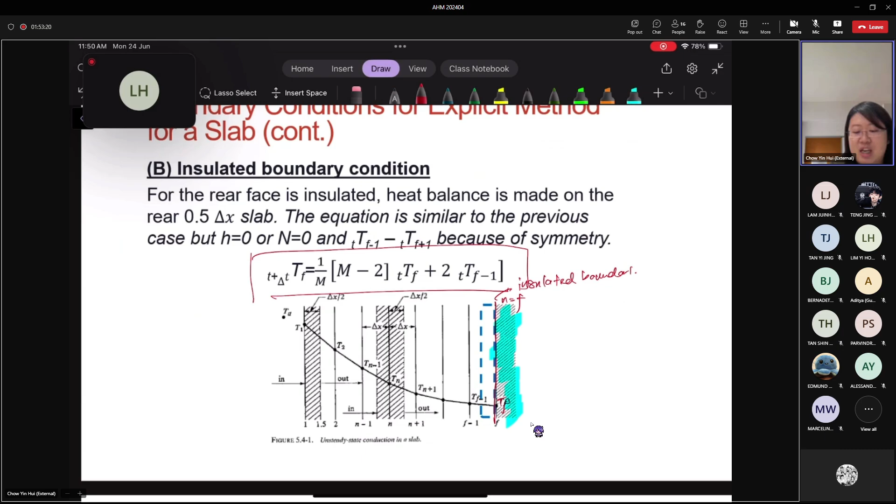Now the last one we also have here: let's say at this Tn, if it's the case where we have insulation - which means it's an insulated boundary at the position n equals to f - so if it's the case where it's an insulated boundary, you can try to do the derivation, but here is a simplified form of the equation. So usually for TF at some temperature, at some later time, we can apply this equation for the calculation.

Okay, now it looks a bit very tedious, right? There are a lot of things that need to be calculated.

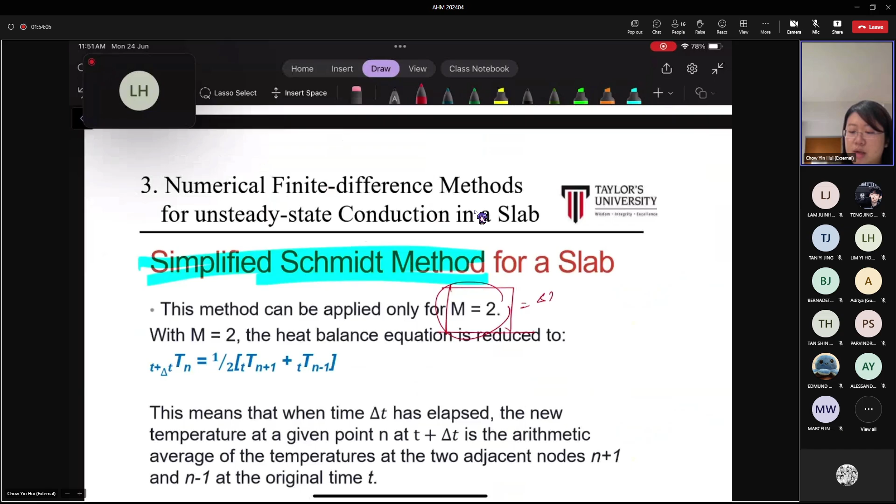So if this value is equals to 2, the case just now for this one, the temperature at the center of slab at some later time, it will then be simplified into this form. Let's look at the equation just now. Just imagine if this value goes to 2 and this value goes to 2, so this part here will be equals to 0.

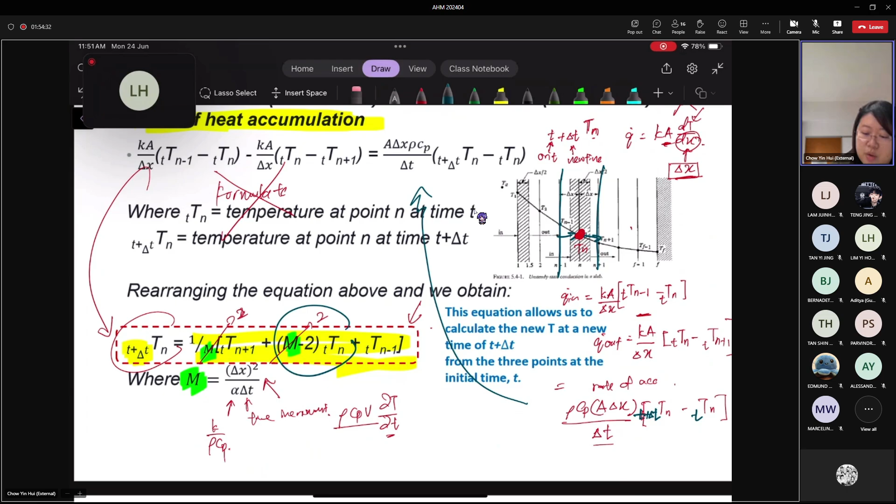So eventually, the temperature at node n at some later time t plus delta t is equals to half of the temperature Tn plus 1 at this position, plus Tn minus 1 at time t. So it's as if the half of the sum of the temperature at these two nodes, if m is equals to 2. So if you are applying the simplified Schmidt method to calculate the temperature at the center of the slab, this is the formula we can use.

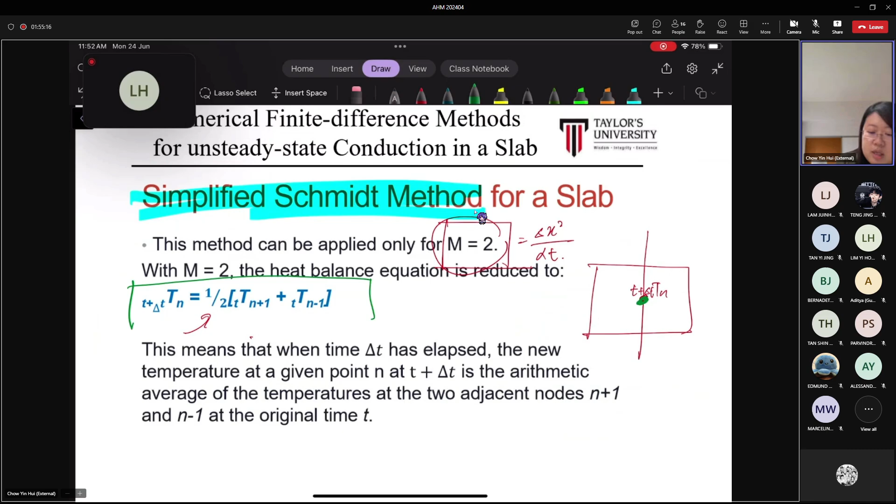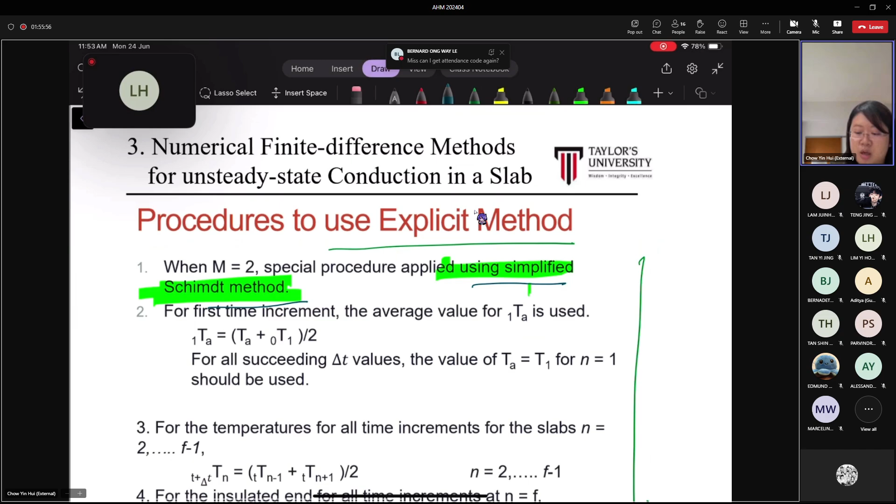There are further procedures here that I'll need to describe, but I think there are a lot of things we covered today already, so I will stop here first, and we will continue tomorrow on the theoretical part on how to solve heat transfer using numerical method and the simplified Schmidt method. This is only one part of it, because later for solving T1, what is the simplified equation? And for solving TF, what is the simplified equation? We'll discuss it tomorrow.

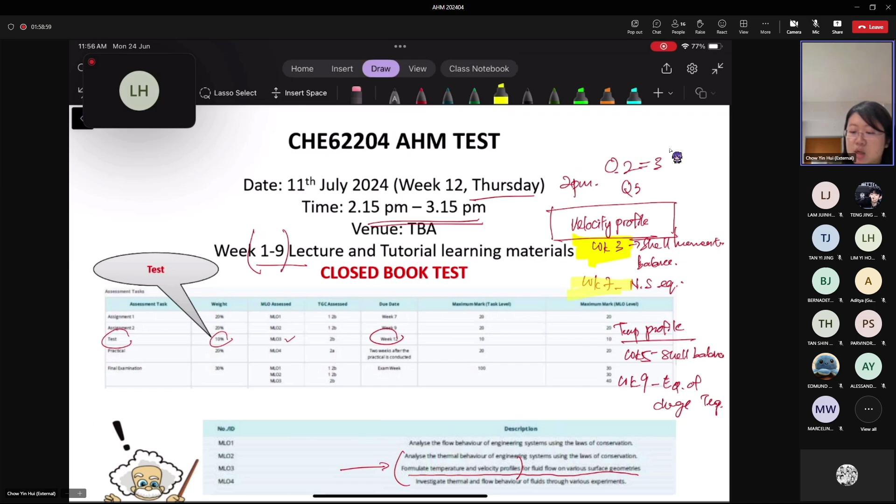As for the temperature profile, we covered it over 2 different weeks as well. That would be on week... let me check, which week? Okay, yep, week 5, which we use the shell balance method to derive the temperature profile. And then another one, on last week, week 9, where you learn about the equation of change of temperature. So you can give more focus to the learning material discussed in these 4 particular weeks. The rest you can just glance through. The reason I cannot opt out other topics is because, for example, when we derive the velocity profile, you need to know what is considered as Newtonian fluid.

What is Newtonian fluid, what is non-Newtonian fluid, and how the formula looks like, is what we learned in week 2 and also week 1. And even for the shell balance method, the basic of it, the conduction equation, how it looks like, how you write it, is from week 4. That's why you still need to go through it, at least have an idea how the equation looks like. But you can put more focus on these 4 weeks, especially when we discuss the formulation of temperature profile.

I'll highlight this, I think definitely there would be one question on shell momentum balance method, so please make sure you master this part. You can start to do a revision on this. If you have any question, you can start to ask me from this week onwards. This topic will definitely be tested. I haven't set the question paper yet, so a week before week 12 I will inform you how many questions. It will be a minimum of 2 questions, one on temperature profile, one on velocity profile.

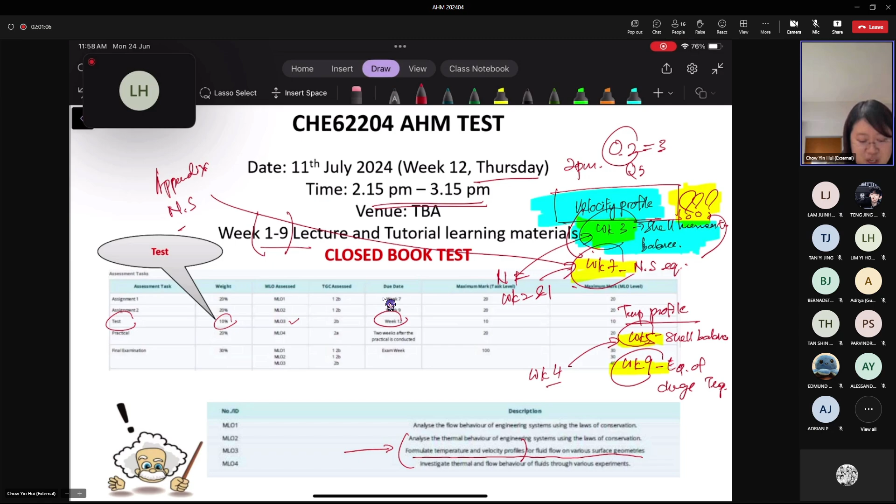Although I mentioned this will definitely be tested, please also go through the Navier-Stokes equation method, because most probably in your question paper, in the appendix, I will also provide you the Navier-Stokes equation. In case, worst case, if you really don't know how to start with the shell momentum balance method, I will allow you to proceed with the Navier-Stokes equation. But take note that because the Navier-Stokes equation starts from a simplified part, you lose some marks on the part where you derive and formulate all the terms from scratch at the start. So you can expect that you may lose half of the percentage of the total marks there.

So that's something that I could help you with. Please study both. Any questions so far?